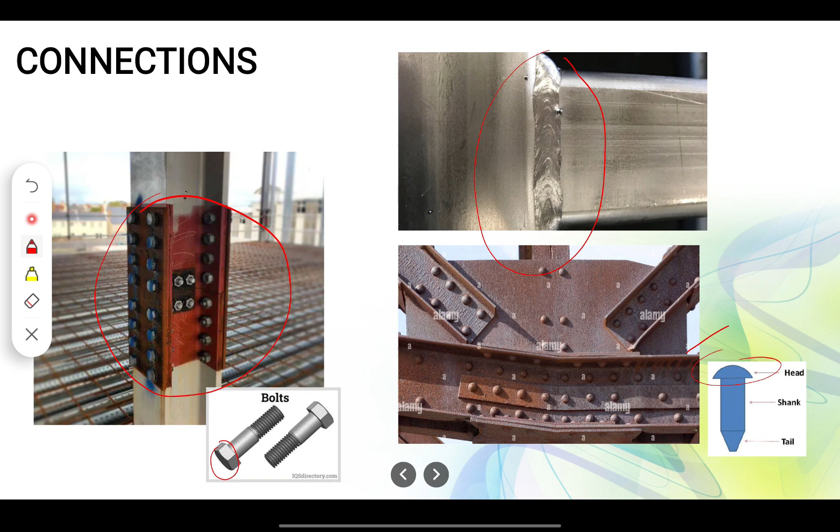But our focus for solving problems in principles of steel design will be simple connections, because we also have the moment type connections - shear and moment type connections. But we also have the eccentric connection - it's also a simple connection in nature, but there's a lot of consideration because we have moment.

But when it comes to simple connections, mostly we have the shear forces applied to the center of the bolts. The most common type of simple connection is the simple bolted connection. The advantage of this is it's an easy method for connecting members on site. In field, bolting is cheaper - it's more preferred because it is cheaper compared to welding.

Different types of bolted connection: we have the shear connection. It can be a single angle, double angle, shear tab or plate. So our plate, we make it as a shear connector. It can also be an end plate, or a seated angle - that's an angle bar.

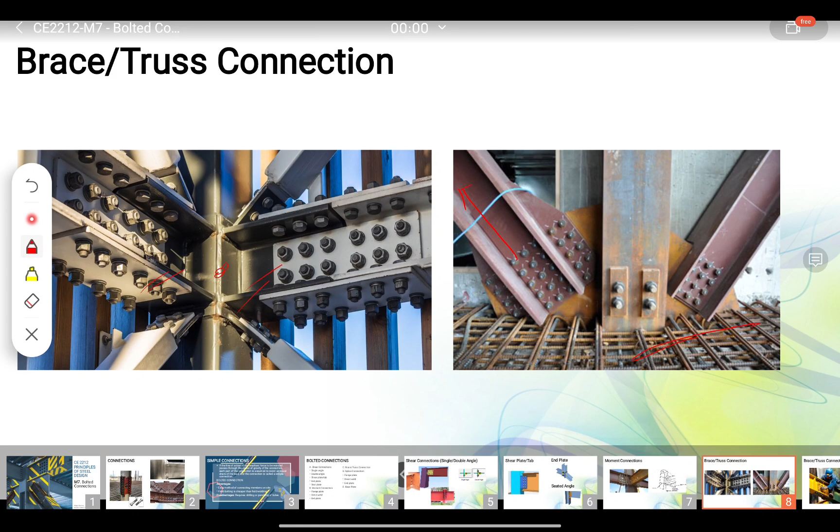So we need many bolts or larger bolt sizes if the axial force is large, because this creates axial tensile stress - tensile force. So when we distribute that and connect these members, we need many bolts to resist that tensile force.

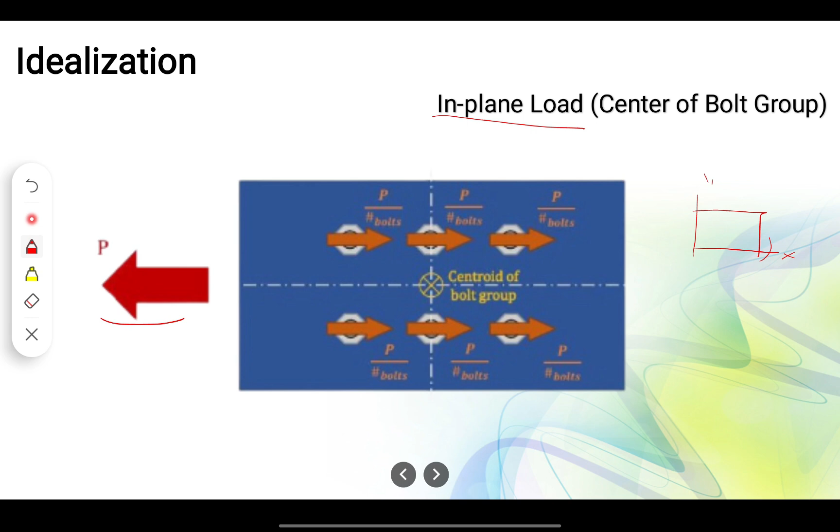So, noon naman nakalagay yung plates natin, XY, sa plane na yun. Pag in-plane load pa din, sa XY applied yung load, pero hindi na siya tatama dun sa center ng bolt group natin. So ano yung magiging effect? Pag merong ganyan, so ito yung center of bolt natin and ito yung force.

So magkakaroon siya ng eccentricity. So yung impact, kailangan natin dalhin yung force na to papunta dun sa centroid. Aside from the direct force, meron din tayong torsional effect. Kailangan natin yan i-consider both.

Aside from the direct shear, usually dinedesignate natin siya, nililabelan natin siya ng PD, na yun yung stresses niya. So from the direct shear over yung number of bolts, and then yung torsional effect. Kailangan na natin i-consider yung polar moment of inertia ng bawat bolts, and then yung moment na ma-generate because of the eccentricity applied, kapag yung load natin applied at a certain distance from the center of the bolt group. So the moment, usually P times E, and then yung distance ng bawat bolt.

So magkakaiba na ngayon yung matatanggap na stresses. Hindi na siya uniform all throughout for the bolts. Usually kapag yung pinakamalayo from the center, yun yung makakatanggap ng most na stresses. But take note of the direction of the components as well.

Kasi meron tayong torsional stress and meron tayong direct shear. Pag yung components na yun ay additive, ibig sabihin mas malaki din yung value na makukuha. Pero kapag nagkokontrahan sila, meron kayong upward Y component and downward Y component, so opposing sila. Ang effect nun, magsusubtract tayo ng value, mas nadidiminish yung makukuha ninyong resultant value.

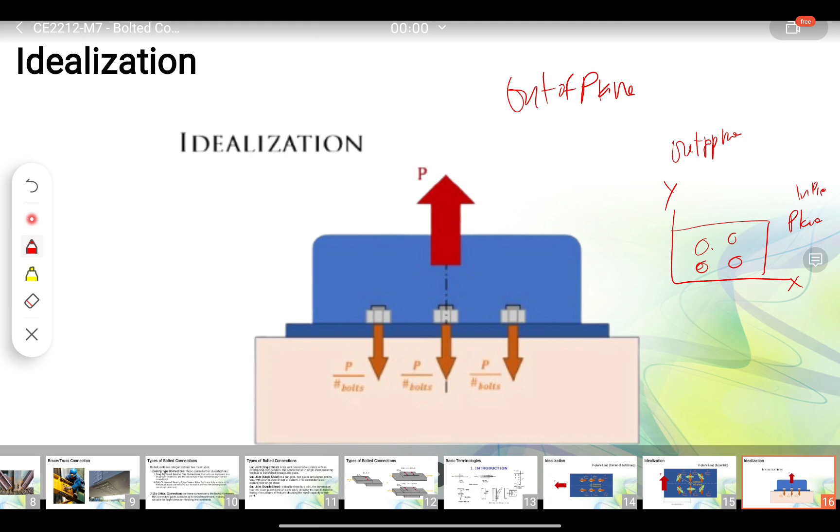So if we have out of plane, perpendicular na siya, yung loads na applied sa bolts perpendicular. Kahit applied siya dun sa center ng bolt group natin, hindi magkakaroon ng flexural effect. Pero ang meron dito, hindi na siya shear, kasi yung force na yon perpendicular na siya dun sa area ng bolts. So it's...

Anong type ng force o stress na siya? Since yung force natin ay perpendicular na doon, normal, it's a tensile stress na siya. So isang force lang yung stress type yung i-consider natin since applied naman siya sa center.

Unlike this one, if meron ulit eccentric, pero out of plane pa din yung force natin, at meron eccentricity, kailangan natin yan dalhin dito. Meron tayong direct tensile force, at yung effect ng moment. Yung effect ng moment matatransfer dito sa bolts. So aside from the direct tensile stress, wala siyang shear, meron pa tayong flexural effect.

Same lang sa mga beam natin, na magkakaroon depende sa orientation ng load natin, ng moment, kung ano yung configuration niya. Kapag ganito yung flexure natin, yung resistance niya dapat opposite, yung resistance ng ating mga bolts. Yung resistance ng bolt natin, tensile siya.

Yung part na to ay same lang yung direction ng na-draw ko, dapat opposing na siya. So yung effect, ito.

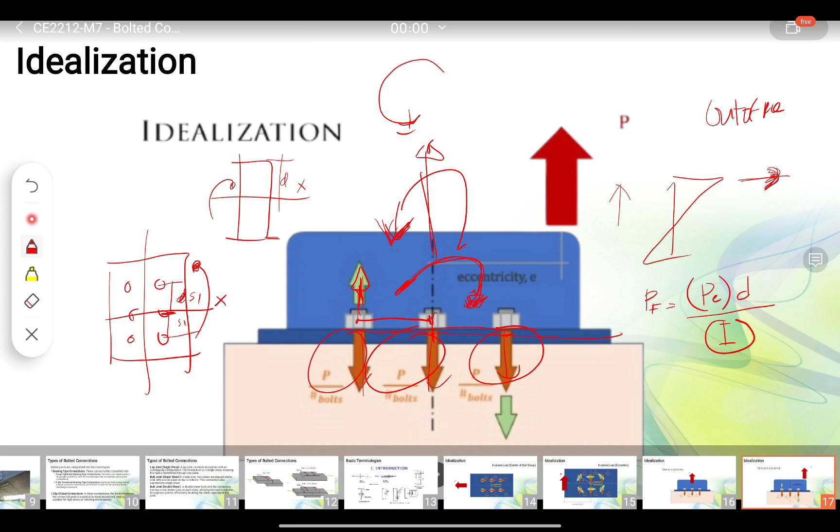So, if given yung spacing na yan, yan yung consider natin, at pag-add lang natin siya. Usually, yung mga stresses na nakuha natin dito ay per bolt, kilonewton, hindi talaga siya actual na MPa. Pero depende, if you have to consider the area, then pwede natin makuha yung actual shear stresses or the stresses experienced by the bolt. For this one, hindi na siya vertical load.

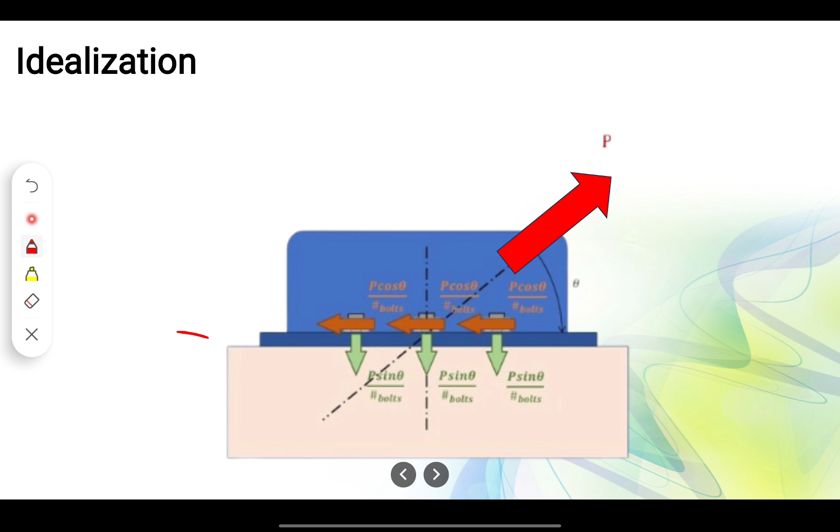Meron din naman tayong horizontal load, pero applied at a certain distance din, so meron tayong eccentricity. Ganun din, magkakaroon siya ng flexural, so it's either a tensile force here and a compressive force here. Pero yung critical for this one ay yung hugutin yung bolts natin from the connecting compared dun sa kung sinisiksik because of the compressive force. Aside from that, yung direct shear natin, magkakaroon ng effect pa din dun sa bolts, pero tatawagin na natin tong combined, kasi meron na siyang tension and meron din siyang shear. Ganun din, kapag meron tayong incline, we also have a tensile force and a shear force.

So, what are the limit states for a bolted connection? Shear and tension kapag merong flexure, and combination ng shear and tension for bolts. However, meron tayong additional considering the bolt and then the connecting member stresses around the circumference of the bolt. Yun yung tinatawag nating bearing, yung contact area ng bolts natin, magkakaroon tayo ng bearing stresses.

So, we have this shear failure, very common. Ito yung direct shear, yung heads ng bolts or body ng bolts yung matatanggal, either the threads. If yung bearing natin, malakas yung bolts ninyo, hindi nasira, pero mahina yung plates natin, since yung consideration natin sa formula for bearing is FU. Ibig sabihin, pag mahina yung FU ninyo, it will have a big chance na mag-fail siya due to bearing. So, yung effect niya is tear out or deformation around the bolt.

So, kapag gano'n na yung bolts natin ay malakas, pero yung circumference, yung stresses, yung plates natin around that, humina na siya, lalaki yung part na yon. Eventually, masisira pa din yung assembly natin kasi lumaki na.

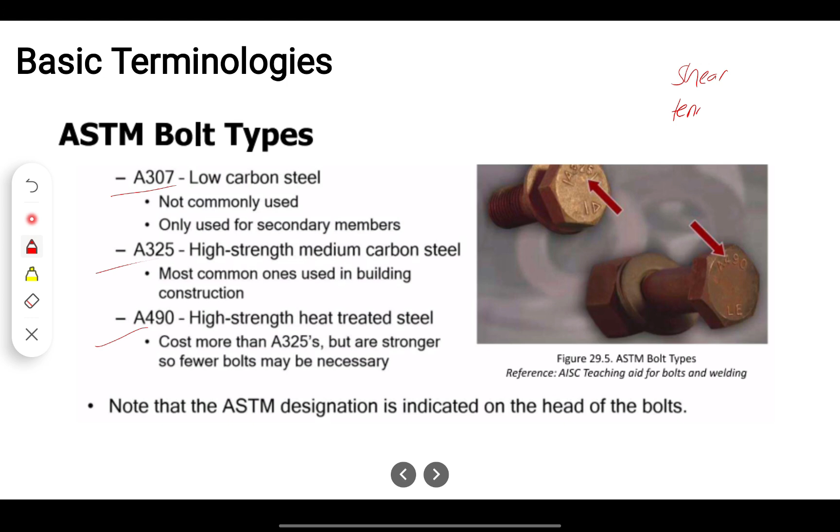So, different types of bolts. Very common, 307, 325, 490. Magkakaiba yung magiging shear, kasi bawat bolt, meron yan shear capacity and tensile capacity. Mamaya, I'll show you the table for the different values of the shear stress.

So, different types of bolts, you can read this, but we can expound this later sa S2. But our focus now, okay, wait lang. Ito yung tinatawag nating threads. Kapag nandito yung connecting member natin, ito yung may chance na mag-fail. Ganyan yung connection, and then yung center, ito yung mga plates natin. Pag ganyan yung configuration, ito yung masisira, so yun yung tinatawag nating threaded.

Threaded part yung masisira. Pero pag dito natin siya nilagay, yung mga connection natin, at dito na install yung bolts natin, so unthreaded yung part na yan. Magiging magkaiba din yung capacity niya kapag ito yung nilagay natin doon sa center. Kapag yung part na yan is threaded, alin sa tingin niyo yung mas maging critical? Kapag threaded, mas lumiliit na yung area, pero kapag unthreaded, yung buong diameter ng bolts yung consider natin. Hindi yung diameter ng head yung i-consider, it's the diameter of the bolts.

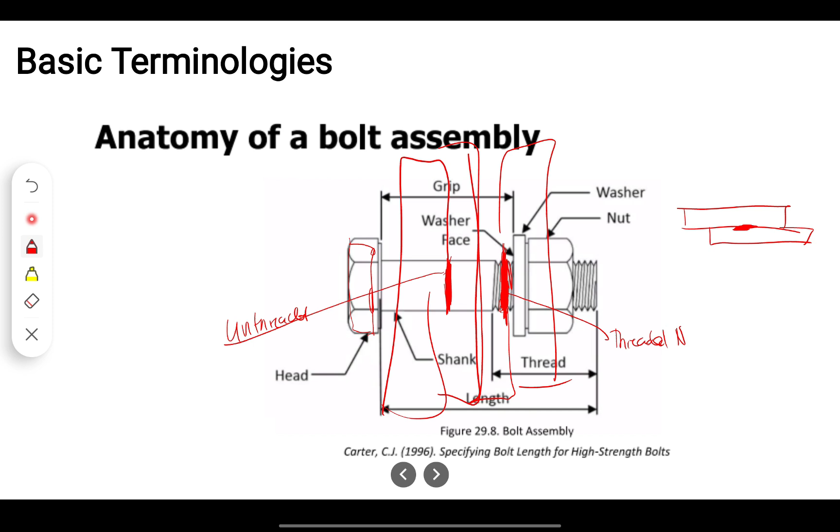So, kung mapapansin niyo na kapag ito yung nakakonect doon, may possible na masira, connected doon sa plate natin, mas maliit yung magiging shear capacity niya. So, let's see the table.

So, we have the shear force and this is the transfer mechanism. Bolt bearing, we have two types.

We need to check the bolt tear out, which is based on our spacing. We need to consider and solve for the spacing between bolts, especially when located at the edge, because the spacing LE and LC that we need to consider differ when it's at the edge. It's important that we design our spacing appropriately because the capacity of bolts against tear out is based on that.

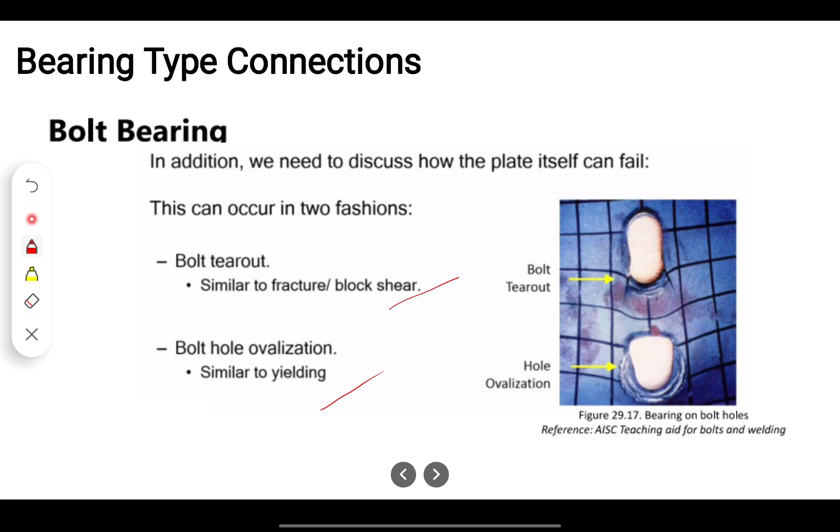So bolt tearout is similar to fracture, like block shear. Bolt hole ovalization is similar to yielding. Okay, so what's the value of the capacity?

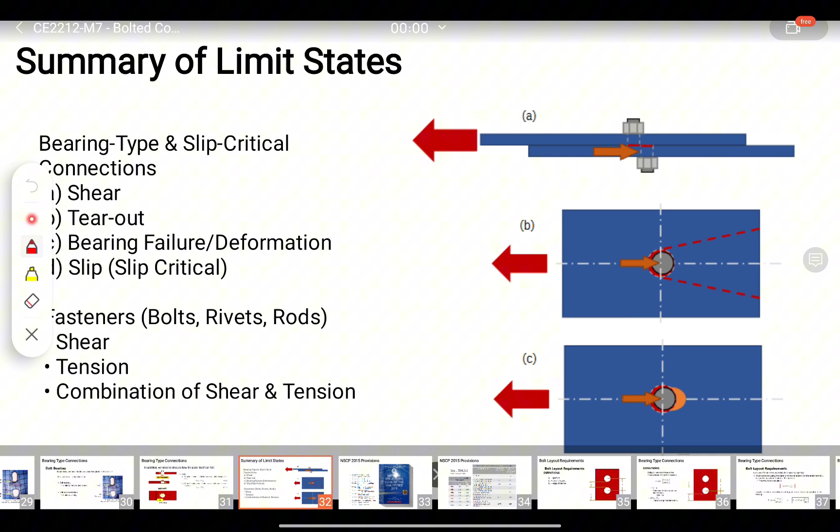Again, for the bearing capacity, there are two considerations: bolt bearing or deformation, and tear out. We can shortcut this by taking whichever is more critical, the minimum between the two - one is for tear out, the other is for hole deformation. Whichever is smaller between the two is what we use for design, same as always - the smaller load is our goal.

Okay, so if the spacing of bolts isn't given, you can estimate it as 3 times the diameter of the bolt. If the diameter is given but the center to center spacing isn't provided, you can use this assumption.

For maximum spacing, we're not allowed to exceed this - it's either the minimum between 14T or 7 inches, which is equivalent to 180mm for SI units.

For edge distance, these are the minimum edge distances. If we're using an M16 bolt, at sheared edges we use 28mm. We can use a higher value than that.

And the maximum for edge is 12T. Unlike sa center to center na 14T, but this one, maximum natin for edge is 12T.

Now for the capacity of our bolts, same lang yung formula natin. Alam na natin yung shear. Basta given, mag-refer lang tayo dun sa table.

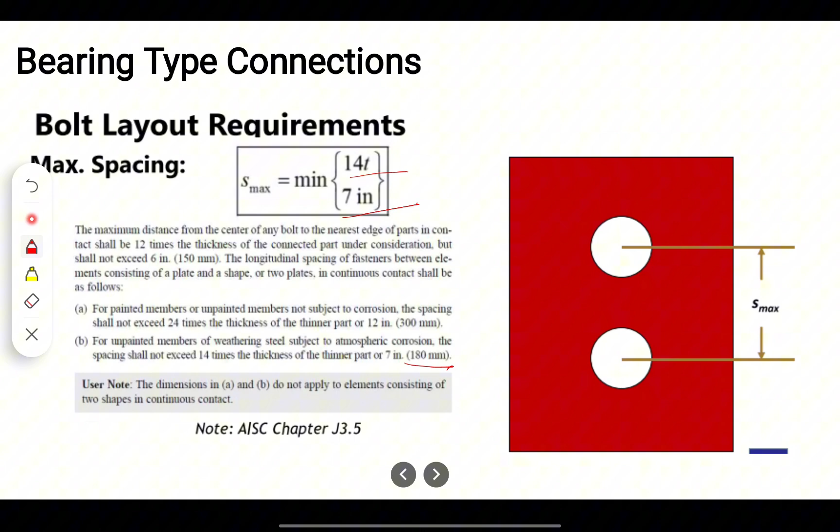Sinabi sa problem na A307, yung tensile stress ng bolts na yun is 310. Predefined na yun, 310 megapascal. So hindi FY, FU ng plate yung ginagamit. Pero pag sinabi sa problem na A36, it refer to the plates.

Tensile plate na gagamitin, so FY, FU. Gagamitin natin to for the yielding, for the gross, for the rupture, and ito, yung FU, ito yung ginagamit natin for bearing. So yung bearing natin na tear out and deformation, FU yung gagamitin. But for the bolt itself, either tension or shear, will be using yung property ng bolts.

So ano ba yung mga typical naming natin? Magkaiba yun, A307, A325, iba siya dun sa A36. Sa mga steel plates yon. Pero sa bolts, may sarili din siyang designation and meron din siyang stress na na-determine because of the testing. Yun yung commercial sizes ng, or capacity, commercial strength ng mga bolts.

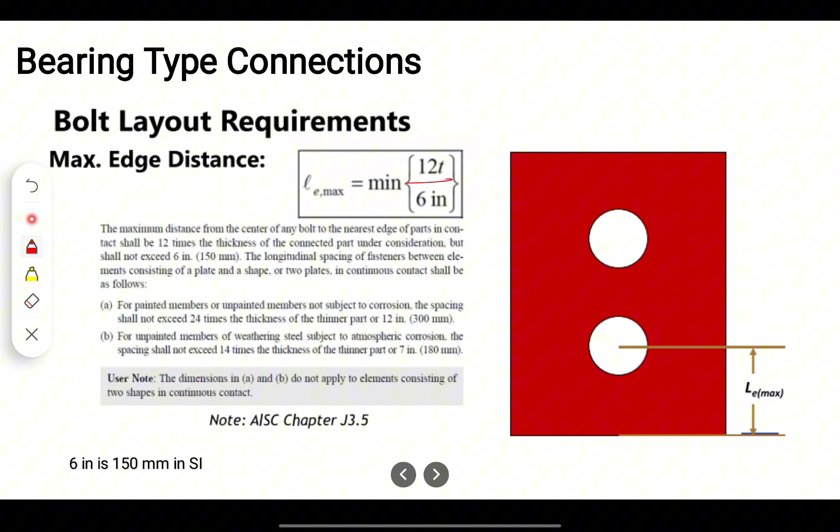So FNT, dapat given niya sa problem. FNV, so stress times area, magkakaroon tayo ng force. Nominal pa lang yan, para makuha natin ulit yung design capacity for due to the bolt, tensile and shear strength, we have to use this reduction factor and factor of safety.

At pag meron tayong combined, kailangan natin kunin yung modified. So yung modified natin, nominal stress pa lang to. Yung nominal stress is 1.3 FNT minus FB. Para makuha natin yung force, multiply na lang natin ng area. Kailangan natin i-modify, hindi na FNT yung gagamitin. Pag combine, kailangan natin siyang i-modify using this formula.

So para makuha natin yung ultimate, kailangan natin siyang mag-multiply pa ng phi, bukod sa 1.3 FNT.

Naulit lang yung formula for bolt bearing. Yung focus lang natin dito is yung part A from NSCP, not this one. Although, if you want to study more, if meron pa ibang details na binigay dun sa problem, then you can use this different types of provision.

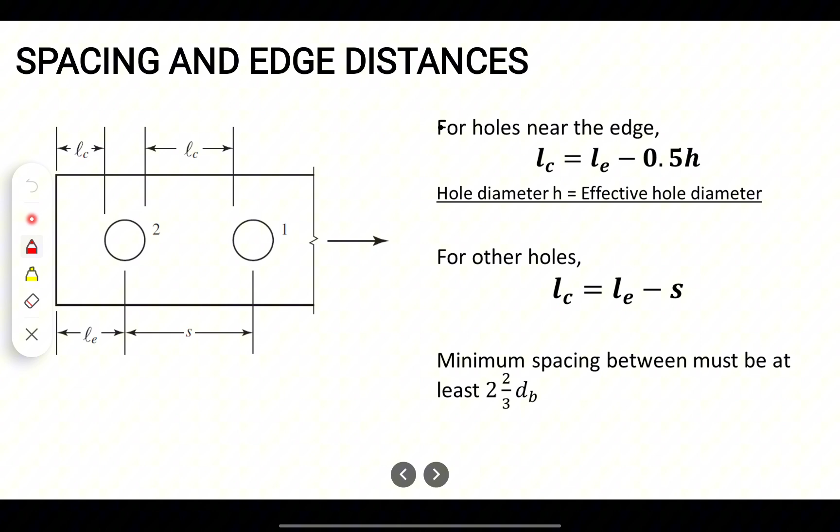Okay so let's start solving problem. Let's try this one. Given tayo ng connection shown in the figure uses a 20 mm and A325 X bolts. Take note na gagamitin ay A325 and then meron siyang X dun sa naming. So the tension member is A36 steel and gusset plate is A572 steel.

So we need to determine the design and allowable strength of the connection considering yielding and rupture of tension member. So we are going back to our lecture 2, which is tensile member, tension member. And we also need to consider now the shear on bolts. So aside from the shear on bolts, we also have to consider the bearing on the plates.

So yung shear on bolts natin, yun lang i-consider kasi wala naman siyang tension. And we assume na applied sa center ng bolt group natin yung force. Also given din yung mga thickness ng mga plates. So the main tensile member is 12 mm plate, and yung gusset plate natin has a 9 mm thickness.

And provided na din po yung mga spacing. So yung edge natin is 37.5 and we also have 75 mm. We also have different spacing. Gawin ko lang tong 32.5, hindi na siya makita. You can almost see the values for the spacing, and the center has a 75 mm and the other edge has a

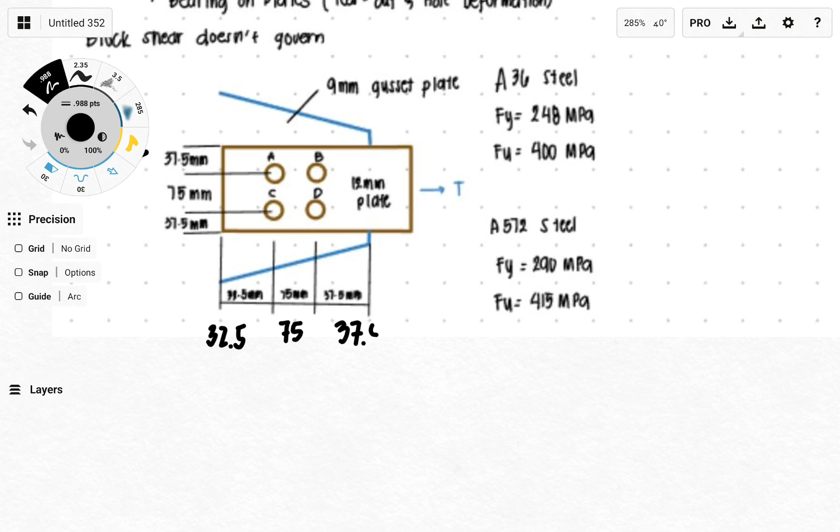37.5 mm, and also listed down the values of the steel properties now for the tensile members and also the gusset plate. Now if we try to look at the table regarding the capacity for our bolt, which is yung bolt na gagamitin ay A325X.

If we're going to refer to the table from NSCP, the tensile capacity or FNT, ito yung tension natin. So it has a 620 megapascal, and the shear stress FNV, if it is shear, so we have to use the designation or subscript of V now if we refer to a shear stress. So it has a 457 MPa.

Okay so our solution, we need to go back to the tensile capacity. So the solution for this one, we start with yielding, of course, for our tension member, and also that's what the question requires. So we have to solve it appropriately, and also we just follow the process. Usually yung mga problems naman natin dito is just procedural, so we just have to follow the process para sa inyo din na hindi tayo maliligaw sa pag-solve. Ganun din kapag nag-e-exam tayo. So nasa process, tamang process lang.

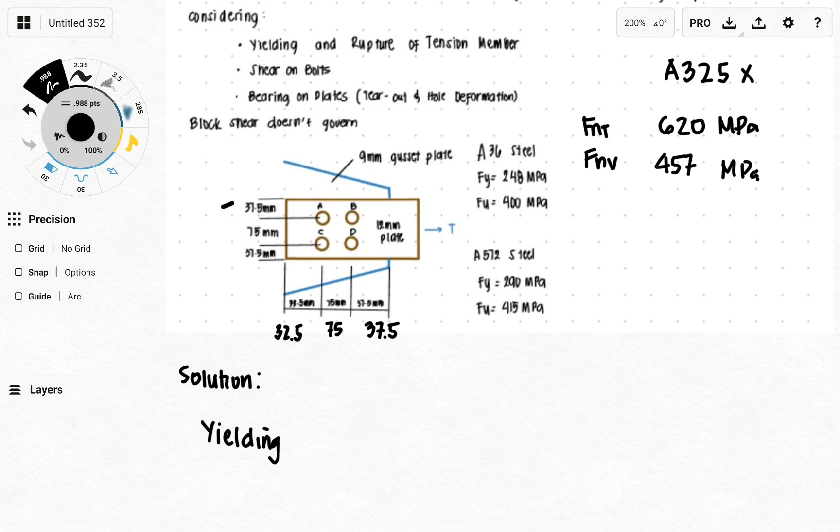I know you're already familiar with that from your previous exams, but we also have to follow the same principle all throughout for most of your design subjects.

Okay, so we start with yielding. For yielding, the formula is based on nominal values first, without reduction factors, because we need to solve for both design philosophies, LRFD and ASD. So for yielding, we have PN, which is FYAG. We already know the yielding value, 248.

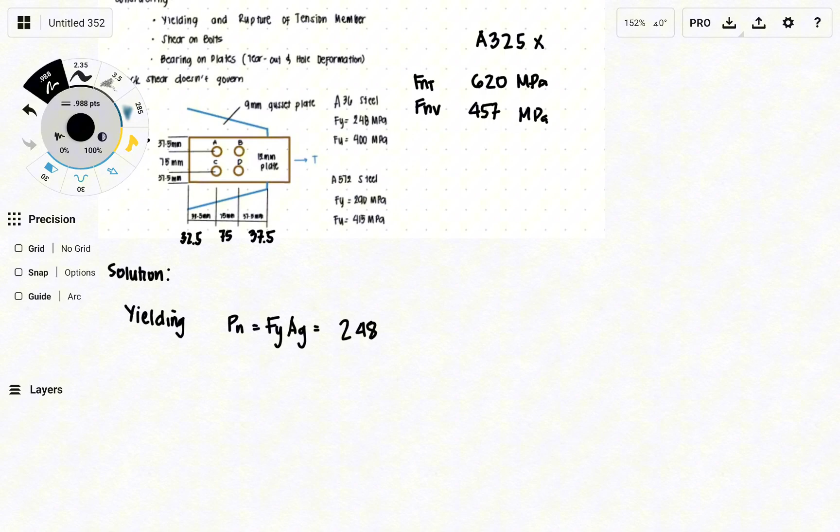So we start with the gusset, no, the tension member. Why did I mention the gusset plate? It's because of the thickness we need to consider later. But for the tension member's yielding and rupture, we don't need to consider the gusset plate, even if it's 9mm, because its area is varying - it's hard to determine what its gross area would be, and also what we'd consider for rupture, since we'd need to deduct the effective diameter of the bolts, which varies. So it's not constant, and we neglect the assumption that the gusset plate would also fail for yielding and rupture. So the critical member is only our tension member against yielding and rupture, because its area is known.

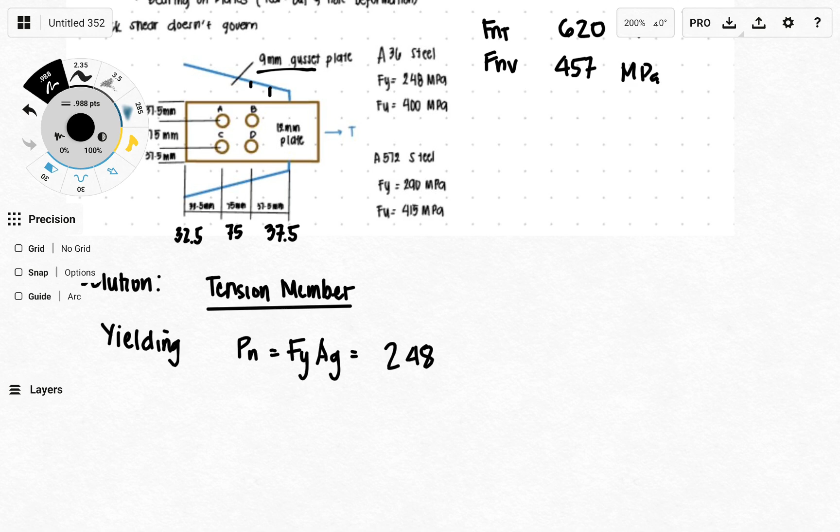Okay, so going back to our solution, FYAG - what is the AG of our tension member? It's a rectangular tension member, so it's not provided directly, but if you try adding all the spacing, what do you think we'll get? Let's try solving for what the width of our plate will be. So 37.5 plus 75 plus another 37.5, giving us 150 for FYAG.

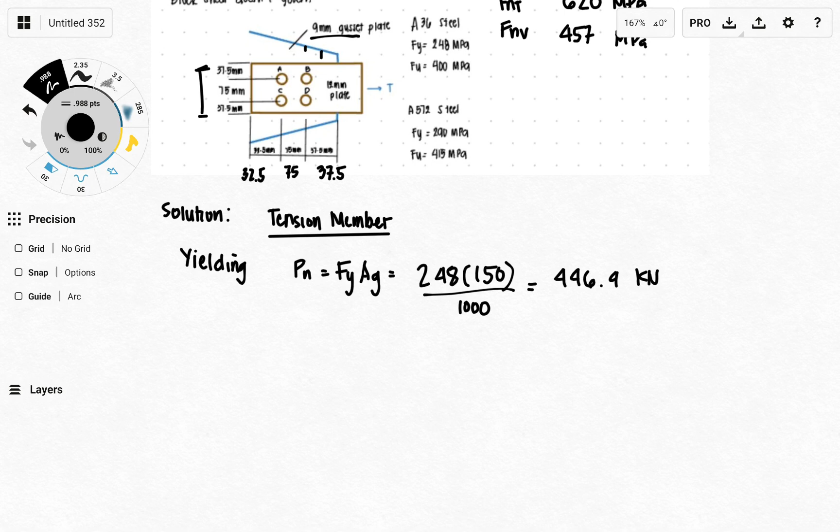So 248 times 150, divided by 1,000, and we get 446.4. Correct me if I'm wrong - you have to resolve this and approach me if there's something wrong in the solution, so we can correct it. Now solving for the ultimate, we just multiply by a phi value: 0.9 times 446.4, we obtain a value of 401.76 kilonewtons.

And for ASD, PN 446.4 over 1.67, we obtain a value of 267.305 kilonewtons. Now for rupture, since all elements of our plate are connected, we use a U value of 1.0.

And the FU value for our plate is 400 megapascal. Now solving for the nominal, our formula for rupture is FU times U times AN. We already know the FU value, and U is 1.0 - you can also neglect that.

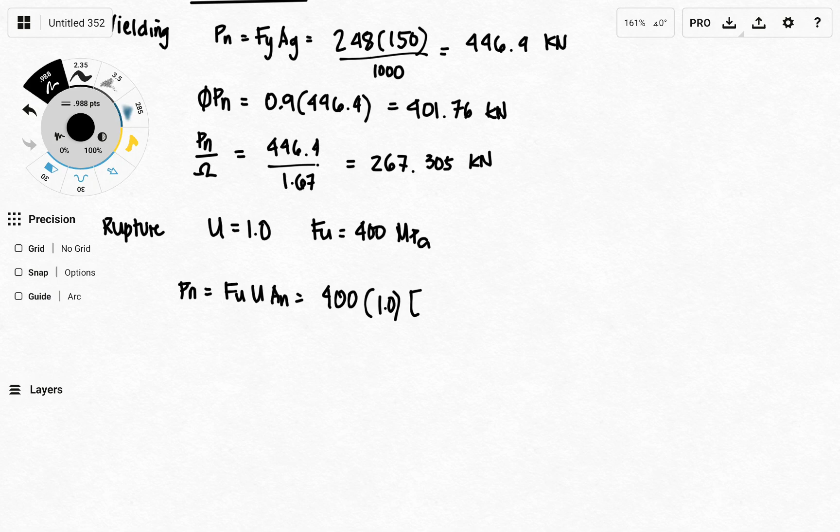And the area net is based on 150, the total width. So this is where we cut, same as if we cut at bolts AC - we just remove two bolts. And the consideration again is the effective diameter. The original diameter of our bolts is 20mm, as given in the problem. Since 20mm is less than 24mm, we add 4, so plus 2 plus 2 - the effective becomes 20 plus 4.

Still remember that? I hope you will not forget these formulas, even in the board exam. I guess in the board exam they usually provide what the diameter of holes will be, but usually the assumption is 3 or 2, depending on whether they're still using the 2001 NSCP. So going back to this, 20 plus 4 is 24 - 24mm already. And then don't forget the thickness.

This is a tensile member, the main tension member, so the thickness is 12mm. We divide it by 1,000, and we obtain 489.6.

Okay, continuing our solution with the normal process - 0.75 times 489.6. Please double check the values I'm getting. Using a calculator, we have 367.2 kilonewtons. And for ASD, we have 489.6 over 2.0, giving 244.8 kilonewtons.

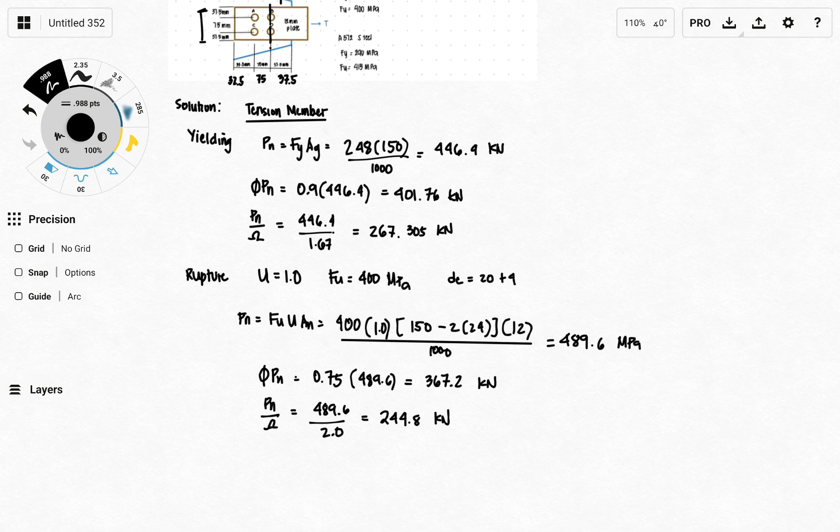So for bolted connections, there's capacity in there - we have the shear force. The effect on the bolts is shear, but the tensile effect is on the tensile member. This might confuse you - the force applied is tensile on the plates of the tension member because it's perpendicular to the area. But since the force on the bolts is divided by the number of bolts, it's parallel to the area, so the effect on the bolts is shear, and that's also how the bolts fail.

So for the third limit states for this whole assembly, a tension member, but we need to consider the bolt shear, because this is what tends to fail. So for bolt shear, what is the AISC 360 provision?

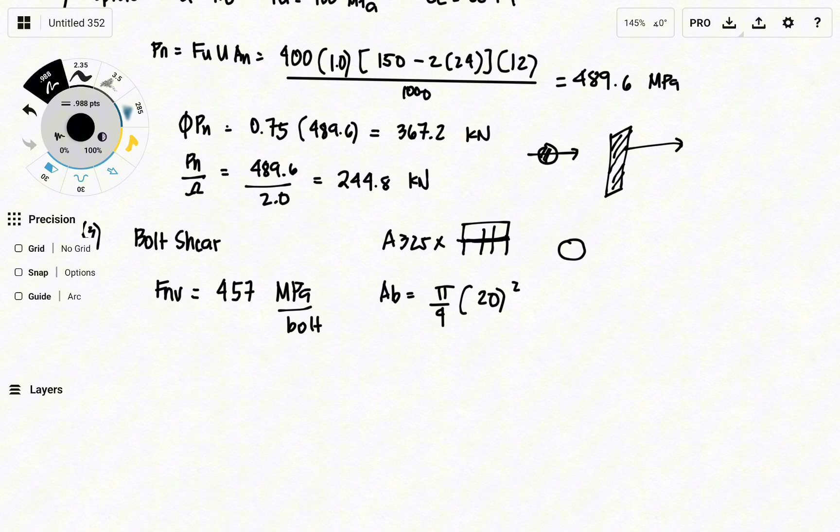So this is not the effective diameter. You might get confused there. So you have to consider that for bolt shear, you have to go back to the raw or original diameter of the bolt.

Now, solving for the nominal capacity for our bolt shear, we now consider the total number of bolts. So FNV times AB times however many bolts there are, because all of those have contribution and that's what will resist our applied force.

Overall, once we get all of the limit states capacities, then again, we compare which is the smallest among all of those limit states, and that will be the design strength of our bolt assembly, including the tension member.

So going back to our solution, so much was discussed. Okay, so we have FNV 457, and then our AB, area of bolts, already provided here, 20 squared. How many bolts are there? If there are many bolts, let's just count them. I think for sure, in this part, you won't make mistakes.

So we have 4 over 1,000. Again, we divide by 1,000 to get the value in kilonewtons. Some of you are still struggling with dimensional analysis. And then, of course, using your calculator, or mentally if you're already really good at solving problems like this.

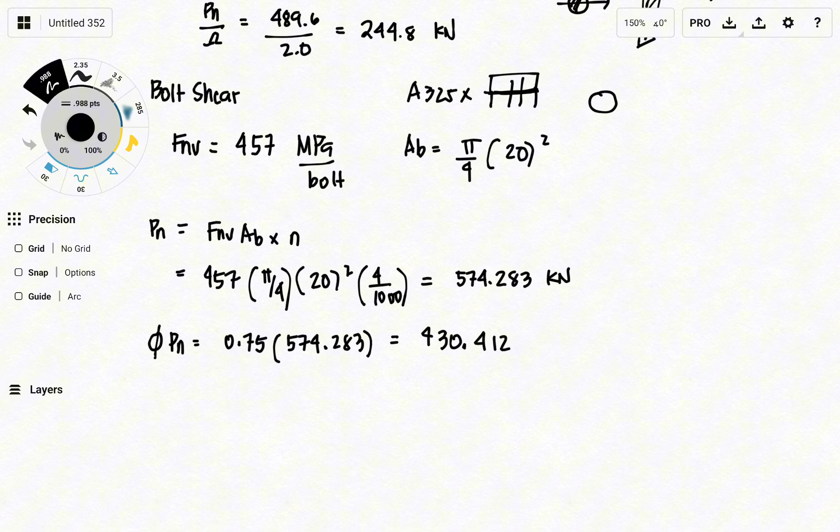574.283, and then we obtain 430.412. And then for ASD, PN over omega, 574.283 over 2.0, then we come up with 287.142 kilonewton. So it's a process, same process all throughout.

So you'll do this, and by trying different problems, I know you can make your solution to this problem as fast as possible, especially when you're doing your examination. Our goal is to beat the clock and solve the problem as accurately as possible.

Now for the fourth limit states, we have bearing. We have two types under bearing failure. Now, for bearing limit states, we have to consider the bolt tear out, which is based on our spacing, and the hole deformation.

So this one is a bit challenging because we need to analyze our bolts individually, since each bolt has a different contribution. We need to check the actual bearing failure of each bolt because the possibility of what governs varies for each bolt—for one bolt, bolt tear out might be what we need to use, and for other bolts, hole deformation might govern.

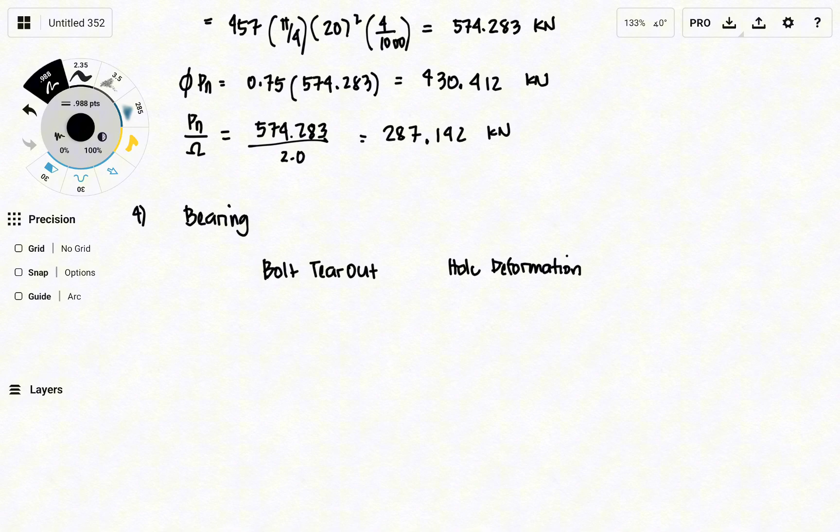So it depends on the diameter of the bolts, but I think the bolts have the same diameter, and the thickness we're going to consider is just the same if we're considering only the tension member. But if we're dealing with bolt tear out, the bolt tear out capacity will differ.

For this problem, we have 4 bolts, and given spacing of 75 and 37.5. Let's double check, baka mali. So we have here 37.5.

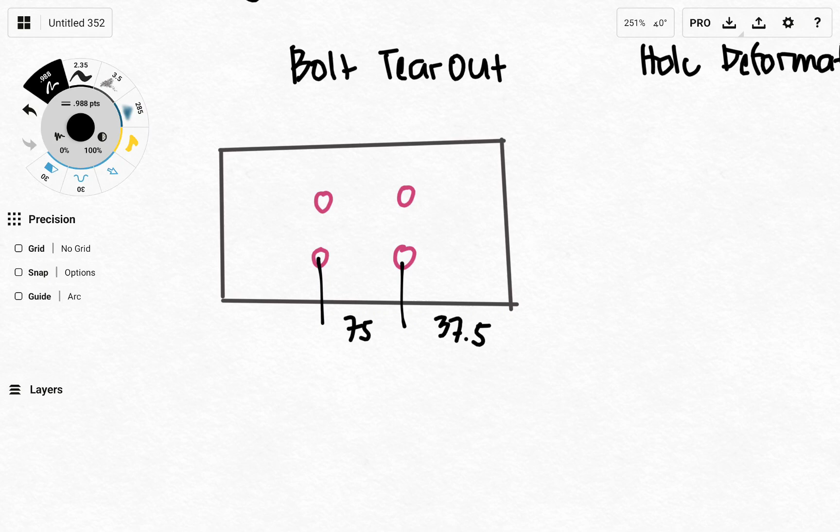For the formula for bolt tear out, we have 1.2 LC times T times FU. So that T, our LC is considered based on the spacing. If it's interior, usually we designate it LC1, but you can use a different designation, LC, LC1. Depende sa inyo, you can use other designation. I can still understand that as long as the process is there and the values and formulas you are using make sense based on what's given in the problem.

And then the next one, LC2, we usually use if it is located at the edge. That spacing is under or at the edge of our plates. So for this one, we have LC1 and LC2. We need to solve for that value.

So why 37.5? Ayan. So our LC, pwede kasi siyang mahila, no? Pag meron tayong tensile force, dito siya mag-extend yung mga bolts na yon, sabay-sabay yan. Worst case scenario, maabot talaga yung dulo. Sabay-sabay sila.

Now, for this type of problem, we need to consider the connecting member and the connecting plate - the connected member and the connecting member. Dalawa kasi yan. So we have to consider both the main tension member and the connecting member, which is the gusset plate.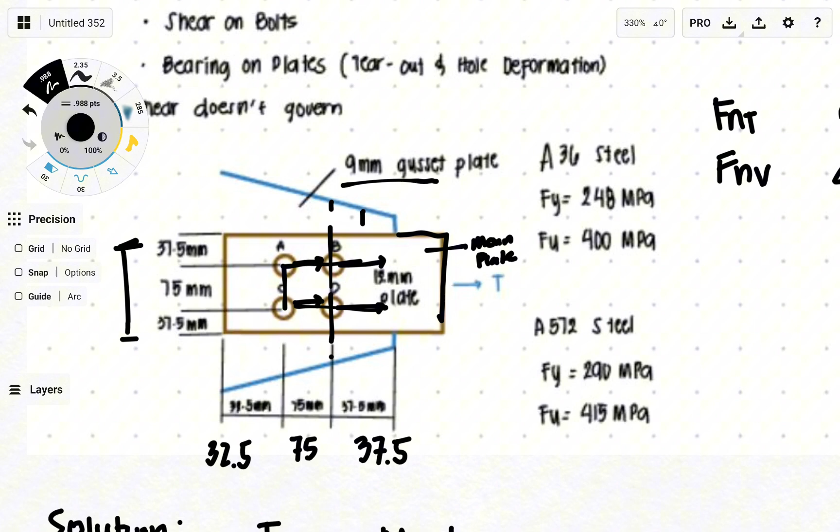Now, what happens if yung gusset plate naman yung i-consider natin? So pag gusset plate kasi, ito yung kailangan natin i-consider na thickness. Yung kabilang side naman, ito yung kailangan natin i-consider na spacing. So magkakaiba yung makukuha nating LC, depende sa kung ano yung configuration natin, kung saan yung direction ng paghila.

So, if we're considering the main plate, ito yung hila ng mga bolts natin, ganito yung tear out niya. Pero pag if we're going to consider the gusset plate, doon naman siya papunta. Yun yung kailangan natin i-consider na spacing. So, let's analyze both. Magkakaiba lang yung ko-consider natin na LC.

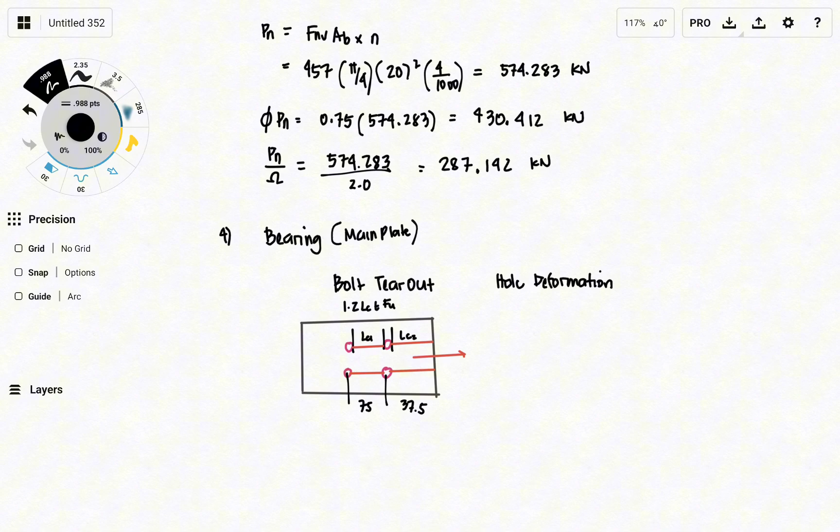So, let's consider first the bearing for our main plate, wherein yung LC na gagamitin natin is yung mga values at the right - the spacing at the right part of the bolt assembly. So we have to solve for LC.

And we also have the hole deformation. So, paano yung mechanism ng hole deformation natin? Simple lang, no? Magde-deform lang yung perimeter ng mga bolts natin. Same lang yan, kahit ano pa yung ABCD natin, because meron designation yung mga bolts.

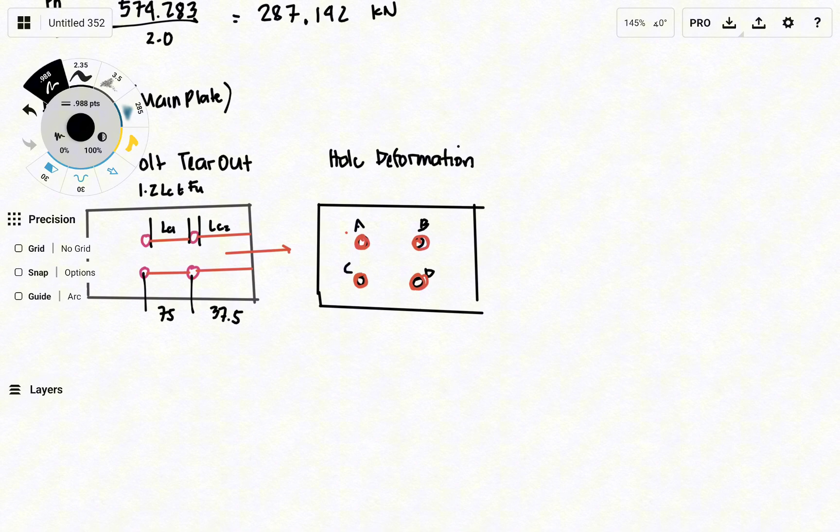So, we have 4 bolts and we can designate it by ABCD. Magde-deform lang yan, lalaki. I don't know if it is the loose thread na tinatawag, but hole deformation can also be referred to as bolt ovalization kasi nag-o-ovalize siya.

And then the formula that we're going to use for hole deformation is 2.4 times the diameter of the bolts - diameter of the bolts, not the effective diameter, baka malito kayo - and thickness, and FU. Now we solve for the LC for our main plate.

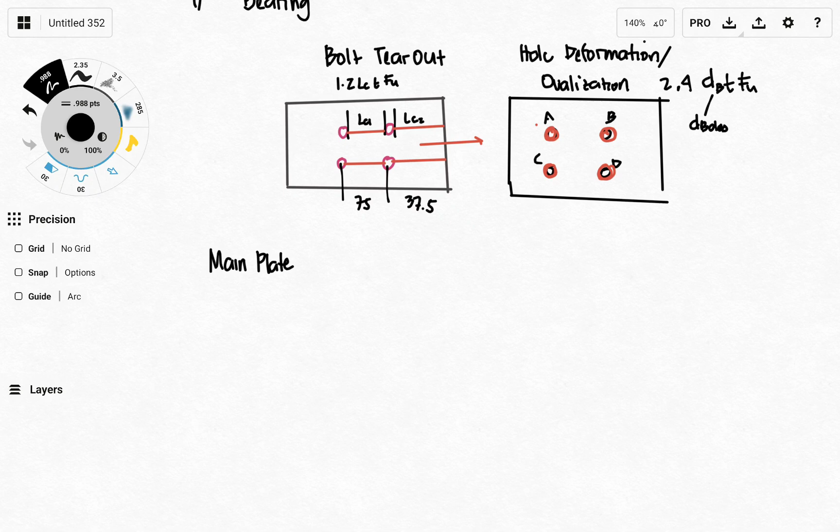So what we are going to use for our main plate. So ibahin natin, no? So again, analyze natin for main plate. Paano ba siya masisira? Okay, so for our main plate, kung ganun yung hugot, dun yung matatanggal. Okay, so magkabaligtad pala, no?

So, pag ganito yung hugot, sa main plate natin, papunta kasi dun yung failure. Parang kagaya dun sa block shear natin. So, dito siya mag-stretch, meaning to say yung kabilang side yung kailangan natin consider LC2 and then LC1. But for the gusset plate, paano ba yung gusset plate natin? So, natanggal na yung we have the gusset plate.

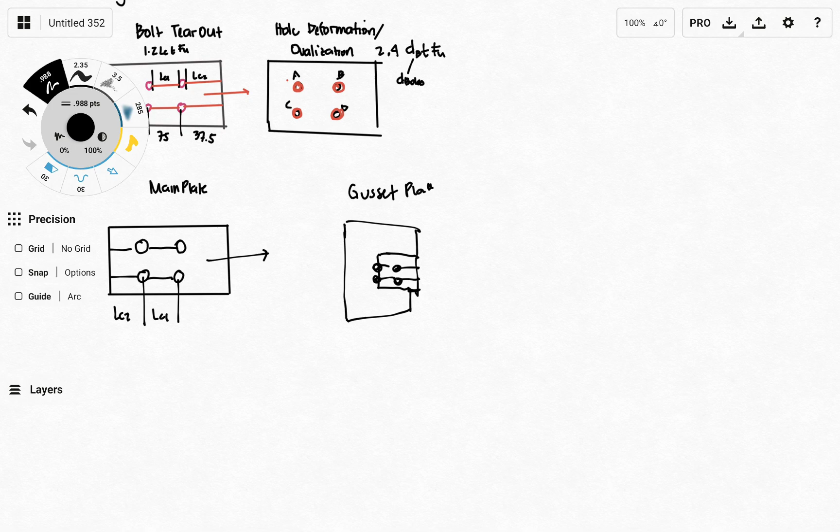So, this is the part of the gusset plate that will be removed, if ever, but extend niya. So here, it's actually opposite. The extension of the gusset plate is on the right, but for the main plate, we need to consider LC2 for our gusset plate and LC1.

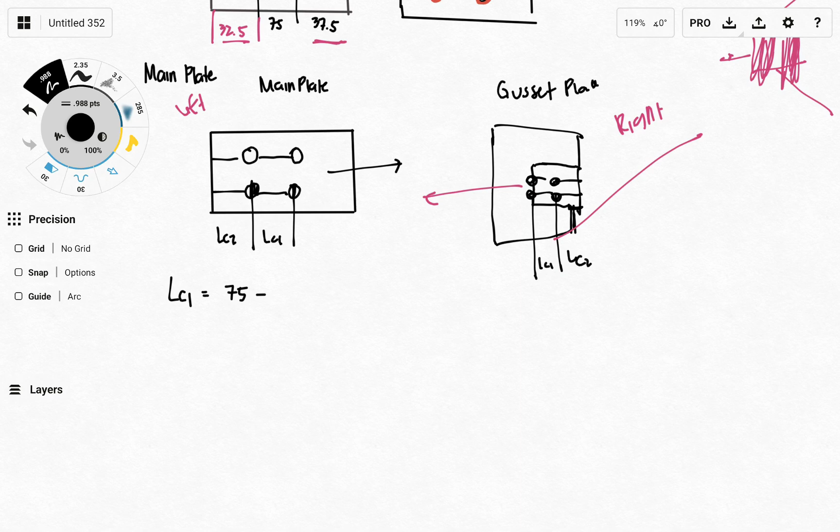Let's start with solving LC1. For LC1, this is just the spacing center to center minus one diameter of the bolts, since half of it will be removed. Effective - don't forget we need to consider effective. So 24, we have 51 mm.

And then for LC2, this spacing is what we need to consider. We have 32.5 and half of the diameter, effective diameter of the holes, 24. So 20.5. And then for the gusset plate, our LC1 will be the same, 75 minus 24, 51. But the LC2 is the other spacing, the right part, which is 37.5 minus 0.5 of 24.

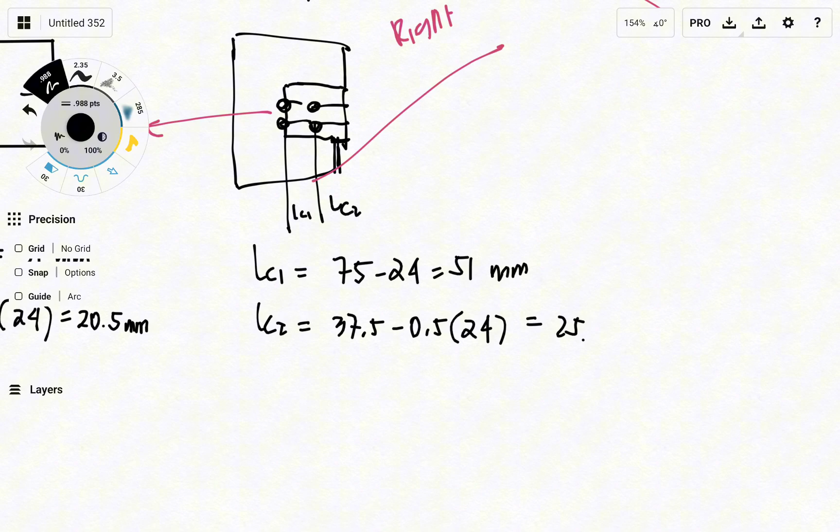Now again, we can solve for the bolts - bolt capacity for both tear out and hole deformation. So these will differ, class. For bolts, we start with bolt A and C - A, B, C. Now this is the challenge: the length, LC, considered by each bolt varies as well. For bolts A and C, they use the same LC, which is the one at the edge.

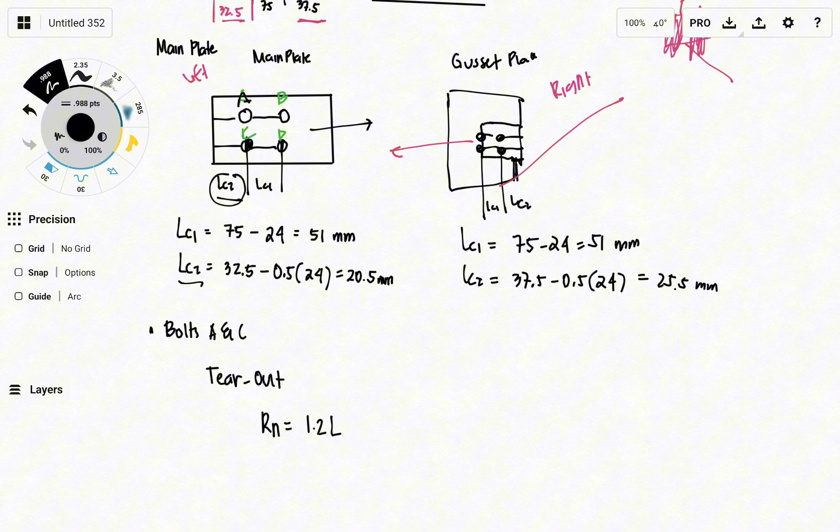So for bolts A and C, LC2 is the one used. So tear out, let's start with tear out. Rn is equal to 1.2, LC2, thickness, and then Fu. So we have 1.2, and 20.5. Our thickness is 12 since the main plate is considered first. Later we'll also consider the gusset plate. Over 400, then divide by 1,000. So we have 118.08 kilonewton - this is per bolt only.

Next, we need to consider the hole deformation. Hole deformation for both A and C will be equal to Rn 2.4 db thickness times Fu. So 2.4 - now the db we need to consider is the original bolt diameter, 20. Times thickness, 12, 400 over 1,000. So why did it become 1.2? We have this 2.4. Then we solve it: 2.4 times 20, 12 times 400 over 1,000. Now we obtain 230.4 kilonewton per bolt.

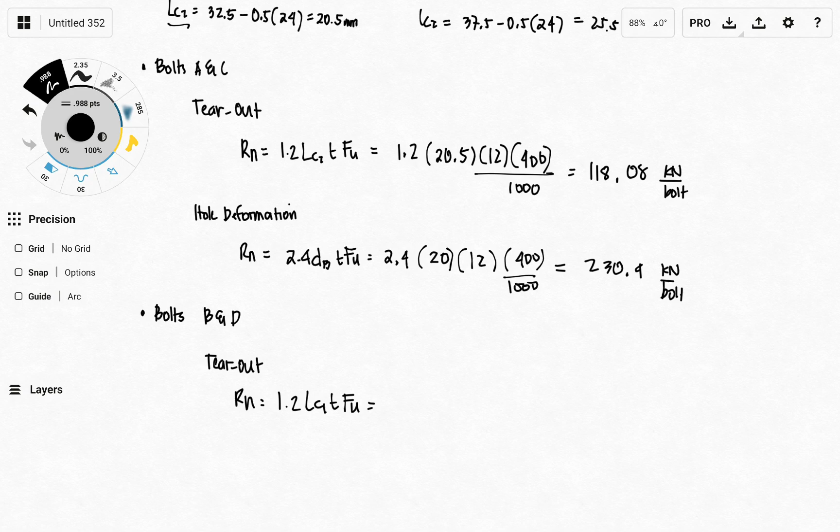Now for bolts B and D, for its tear out, Rn, instead of 1.2 LC2, LC1 is the one used. So it is LC1 that we are going to use for bolts B and D. And we have 1.2 LC1 already computed for this value, which is 51. We expect a larger value between these two. 12, 400, 1,000. Now going back to bolts A and C, we need to pick whichever is smaller between this value - only one can govern.

So for bolts A and C, it is the tear out that will govern because it gave us the smaller value. And then we have here for bolts B and D. Solving this: 1.2, 51 times 12, 400 over 1,000. Then we obtain 293.76 kilonewton per bolt, so it's much larger because of the spacing. Now for hole deformation, even though we will not further expand the formula, we will obtain the same value, which is 230.4. Comparing these two values for bolts B and D, tear out and hole deformation, we need to pick the smaller. So for bolts B and D, it is not the tear out that will govern - it's the hole deformation because it yields us the smaller value between the two.

Okay, so 230.4 is what will govern for this. Now we have to combine. Since per bolt, we'll count how many bolts we're considering for each row or layer of bolts. So for overall, our Rn against bearing will be 118.08.

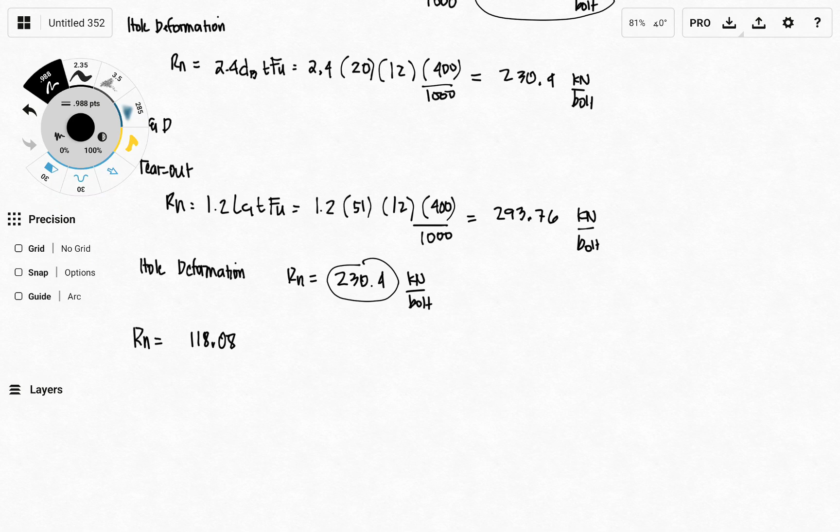How many is that? We have two bolts there, bolts A and C, which are located at the edge. So that's just two. Plus 230.4 for bolts B and D, which is also two bolts. So we just need to add all of these values: 118.08 times 2 plus 230.4 times 2.

696.96 kilonewton. Now we can apply the reduction factor to obtain the LRFD values. So 0.75 will also be used for bearing — not challenging anymore since the reduction factors are almost the same, and of course you'll use NSCP for your exam. So Rn over omega equals 696.96, with 0.75 used for LRFD, and 2.0 for ASD.

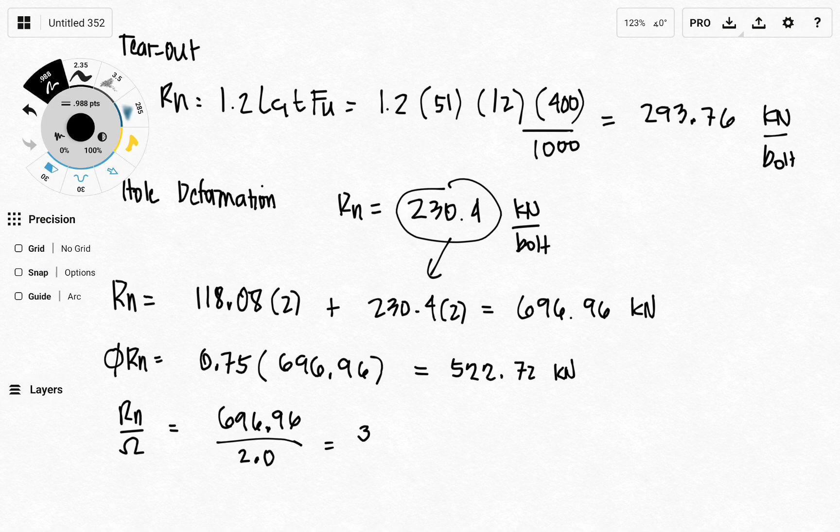The process of solving for connections takes a long time, there's additional work involved. Let me double check this since I'm trying to solve it. So that's 696.96 over 2. If we solve this, it will consume a lot of time, but we will try to solve some more problems tomorrow.

So we obtained 348.3. Aside from that, we also need to check the gusset plate part, since there's a possibility this will govern. For gusset plate, what changes is the thickness and the LCs we'll use. There's a chance this governs because of its smaller thickness. For bolts, it's now different.

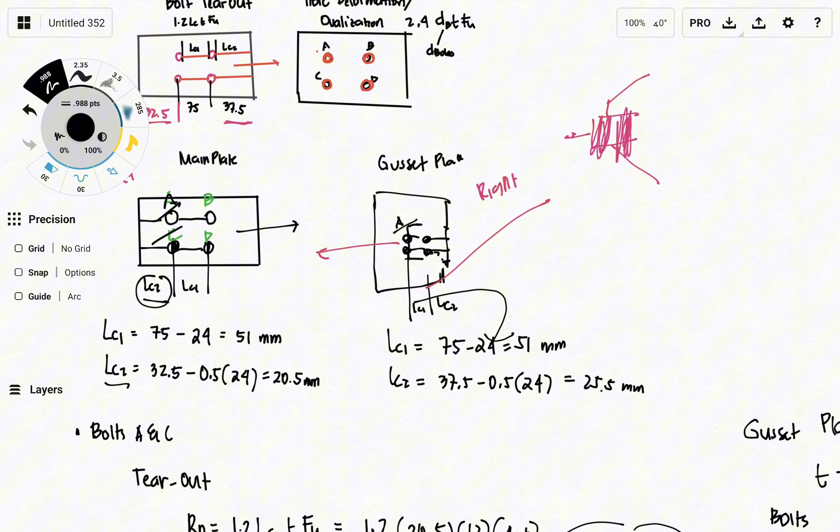For the gusset plate, we have A, B, C, D. For A and B, we'll use the interior case — so it's different now, meaning we mislabeled earlier. This one will be A, B, C, D. For bolts A and C, the LC we'll use is this one, the 51 mm, which is what we used for bolts B and D referring to the main plate.

They just differ in thickness, so we'll use this for the tear out. For tear out, we can just use ratio and proportion to be faster, so 9 over 12 since the spacing is the same. That gives 293.76 times 9 over 12. It becomes lower, from 293 down to 220.32 kN per bolt.

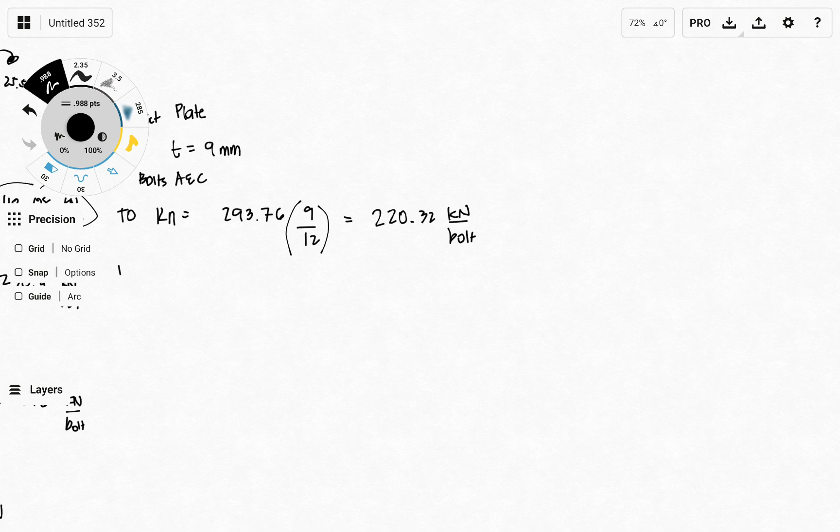This one covers tear out and hole deformation or ovalization, you can call it either. For B and D, we can also use ratio and proportion: 230.4 times 9 over 12, removing the 12 mm. So we obtain 172.8, which is much smaller. Between these two, for bolts A and C, you pick the smaller value.

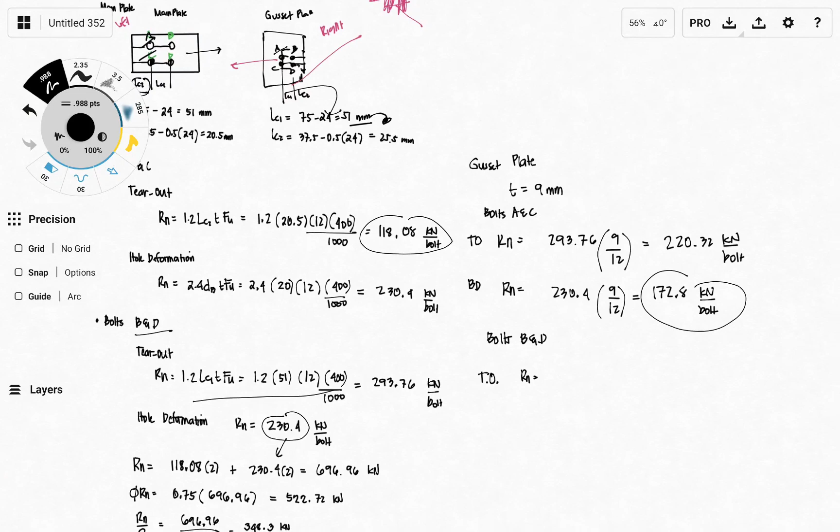Now for bolts B and D, the tear out Rn will use a different spacing, 25.5, which is much larger than the 20.5 we originally used for the tension member bolts. You might get confused because we have a lot of considerations, even though what we're considering is a simple system — just a gusset plate and a tension member.

This isn't even the complicated connections yet, but the process is already tedious as you can see here. But that's how designers work — if you really want to become a structural design engineer, you have to know the basics, the process of solving the problem. That's the requirement.

But of course, if we make one mistake, it affects our final results. But then again, these are all procedural — you'll get used to it, as long as you solve many problems, you become familiar with the process and with the sources of our mistakes.

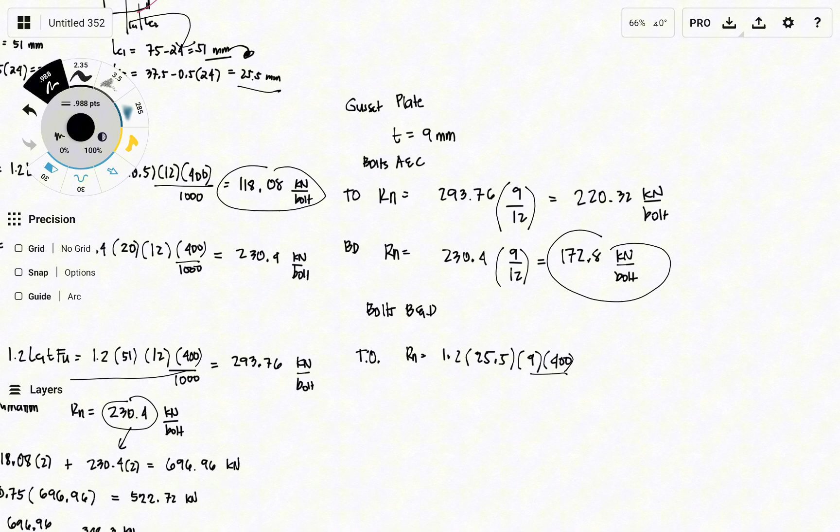Let's continue going back to this problem — a lot of comments have been made. So solving this Rn tear out, what if we try to solve it again? 1.2, don't use ratio and proportion anymore since we'll be using 25.5, but you can use ratio and proportion to shorten the process. So instead of 12, we'll use 9, then 400 — same thing, we divide by 1,000. Now for this one, the problem already took 30 minutes.

So we have 110.16, mas mababa compared dun sa original na 118. And then yung hole deformation will be the same, 172.8. Now we have to pick which one will govern. So 110.16 obviously. So again, we have to solve the total bearing. We expect na dito, ito yung mas mababa.

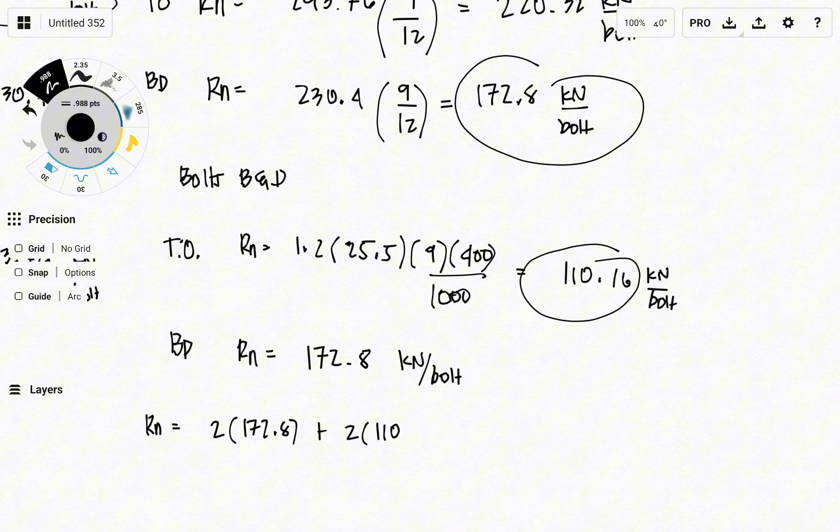Now for bolts B and D, we have to use 172.8, and then 110.16 for bolts A and C. So tig-dalawa yan, so pag madaming bolts, madami din kayong i-multiply. But you have to solve individually, each the capacity. Ganun yung sa final exam ninyo. Single bolts usually yung sinosolve, but to counteract the total force that we need to apply, we just multiply it by the number of bolts.

Magkaiba lang yung per bolt capacity nila against bearing. So in total, we have 565.92 kN, and hindi na siya per bolt kasi multiply na natin siya ng number of bolts. Excuse, and naubo pa tayo, that's why we can't be able to have a discussion.

And now solving for the resistance. So 0.75, times 565.92.

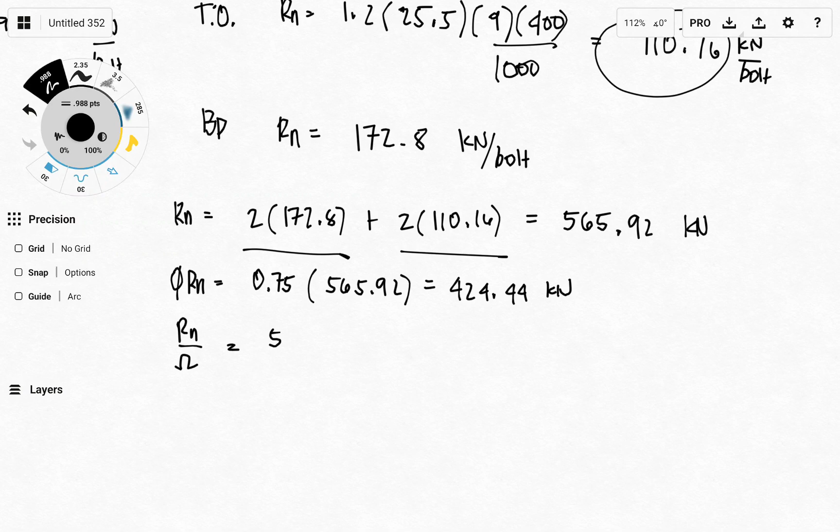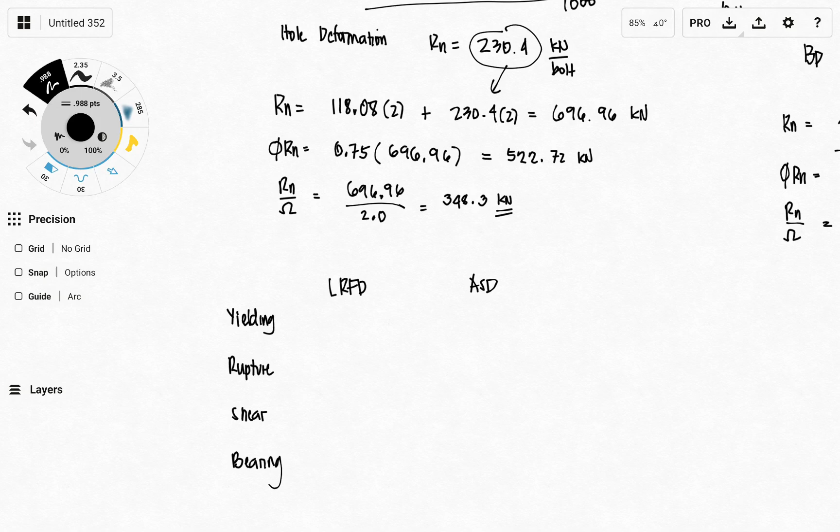Okay, so ngayon we need to pick which will be the design value that we're going to apply sa system. So the best way to do, para ma-determine natin, is to summarize yung mga nakuha natin na values under different limit states. So we start with yielding, rupture, bolt shear, and yung bearing for both LRFD and ASD, and then we just select whichever is smallest between those four limit states.

So we start with yielding, 401.76. Natandaan natin yung mga values. Lahat ng values ay in kilonewton.

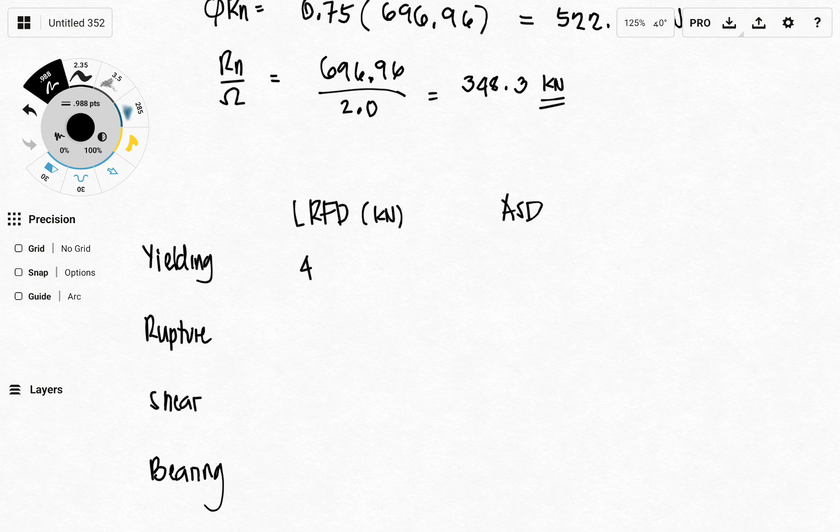401.76 and 267.305. Rupture: 367.2, 244.8. For bolt shear: 430.412, 287.142. And now for the bolt bearing, yung gusset plate yung critical: 424.44, and for ASD: 282.96. At almost close yung mga values.

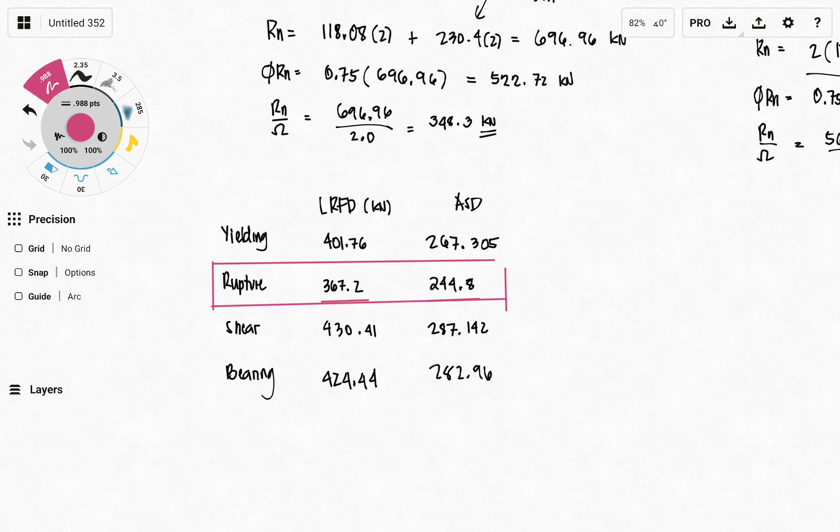And now our goal is to pick whichever of these four limit states, for the two different philosophies. So for overall, it is the rupture. Rupture pa din yung mag-govern because it gave us the smallest between these four limit states. So for rupture, we have 367, and also nag-reflect dun sa ASD, which is the smallest, 244. So all in all, despite considering the bolt shear and the bearing, it's still the rupture yung critical between these four.

So if you apply sa system ng 400 kilonewton, say for example, ito yung in-apply natin dun sa system, ito yung magiging high stress, no? Yung rupture yung magkakaroon ng most stress part. So our goal ay bawal tayo mag-apply ng mas mag-exceed pa dito sa 367. So most likely yung kailangan lang natin i-apply is 300 kilonewton, 360, as long as less than sa rupture. Kasi pag nag-apply tayo ng 400, pasado lang siya sa yielding, shear, bearing, pero hindi na siya pasado sa rupture. So we have to pick the smallest between this.

So for this problem, it is the rupture that is critical, and yun yung nag-govern for our design. So we need to apply a force here, a tensile force, with respect to the rupture value that we obtain, because yun yung critical aside over the other limit states. So I think that's it.

We will try a different problem for this one. How about we try this one? The same bearing type connection. So for our problem 2, given tayo ng bolt joint, and there's a load applied which is 300 kilonewton dead load and 500 kilonewton service live load. Then we need to determine the required number of 20 mm.

A325 bolts in standard holes with threads excluded from the shear planes. Then we assume that deformation at the bolt hole is a design consideration. So all plates are ASTM A36, and the standard hole for 20 is 22 mm. So therefore the effective hole will be 20 plus 4, or 22 plus 2. It's just the same.

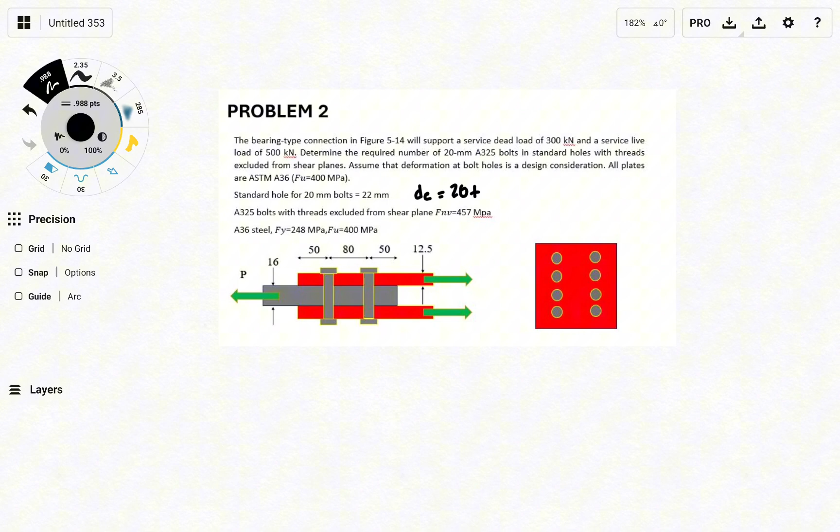Standard holes yung tawag natin. Para maging effective, we just add 2. But for now, the original diameter of bolts plus 4, or pwede din 22 plus 2, same lang yan, standard holes plus 2. So we have 24 mm. And provided na din yung shear, so we'll be using 4 rows per column of our bolts. So yun yung assumption natin.

So for this problem, aalamin lang natin kung ilan yung bolts na kailangan. Given tayo ng 2, we'll see kung ilan yung kailangan for this one. We'll try first to solve kung ano yung magiging capacity natin for shear or bearing. So we have 2 limit states that we need to consider.

Okay, so for this one, the reason why we only limit our limit states to shear and bearing, and not consider yielding and rupture, is because we don't know yet the number of bolts needed. And the number of bolts depends on what the width of the plates will be. So if we need a lot of bolts, like 10 or 5 bolts per column, then the thickness and width of our plate becomes larger. Therefore, yielding and rupture is not a consideration for this type of problem. So our goal is just to solve for the number of bolts depending on the shear capacity and bearing capacity of our bolts and also the plates.

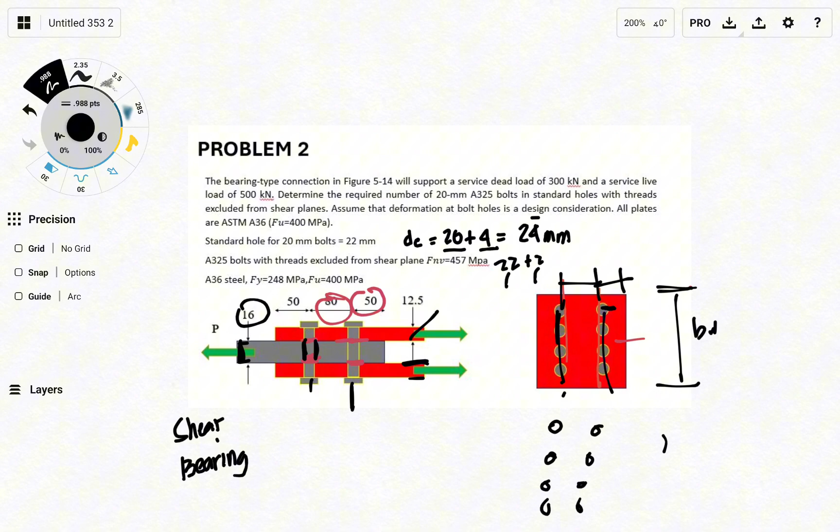Now, we can still solve this problem regardless of whether we have the width. As long as we have the spacing, interior and edge, we can solve for the bearing capacity. So for this one, we'll stick with 2 layers of columns, that's the constant. But what's not constant is how many bolts per layer of columns, because we can make the width of our connection plate bigger, but we can't change the spacing provided in the problem. So we'll be focusing on shear and bearing.

Okay, so the shearing capacity, we don't know yet how many bolts are needed. But we have the PU. So we'll try to limit it to the LRFD condition only. So PU equals 1.2 times the dead load of 300 plus 1.6 times the live load.

Alright, so our goal is just to equate this to our formula for shear. So we'll try to solve this: 1.2 of 300 plus 1.6 of 500. Then we obtain 1160 kilonewtons.

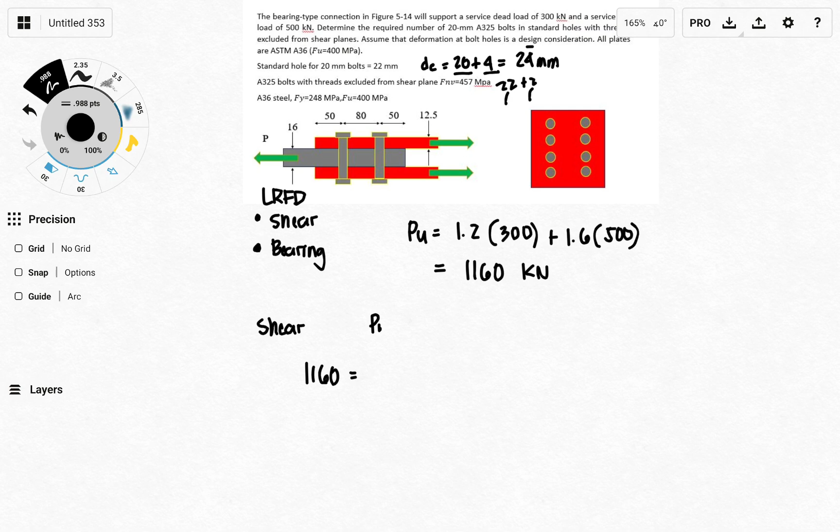Okay, so we start with the shear. So we use LRFD for the solution: 1160 equals pi over 4, and let's not forget the reduction factor. So phi Pn for shear is phi times area of bolts times Fnv, which is 0.75 times area of bolts, and the number of bolts. We use pi over 4 times the nominal diameter of the bolts, Fnv given in the problem, and the number of bolts required. This is the easiest part.

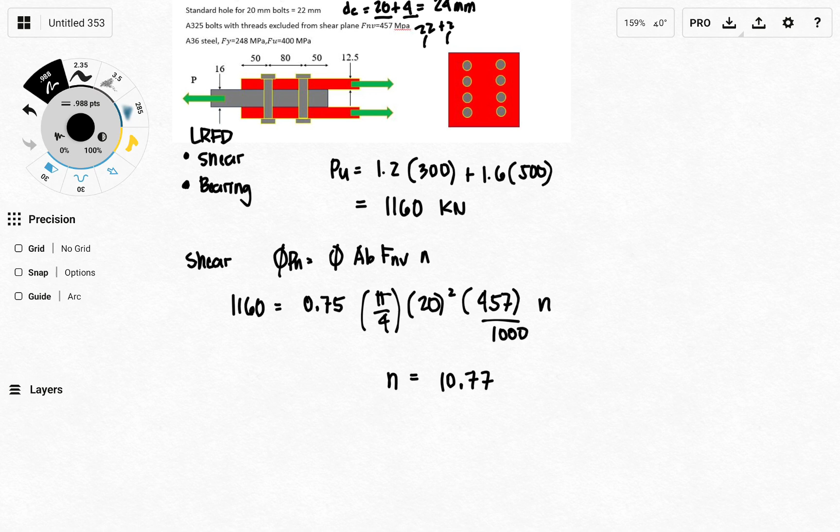It gets a bit more challenging when we now consider the bearing. So let's try to solve this: 0.75, then pi over 4, 20 squared, 457. Then we obtain 10.77.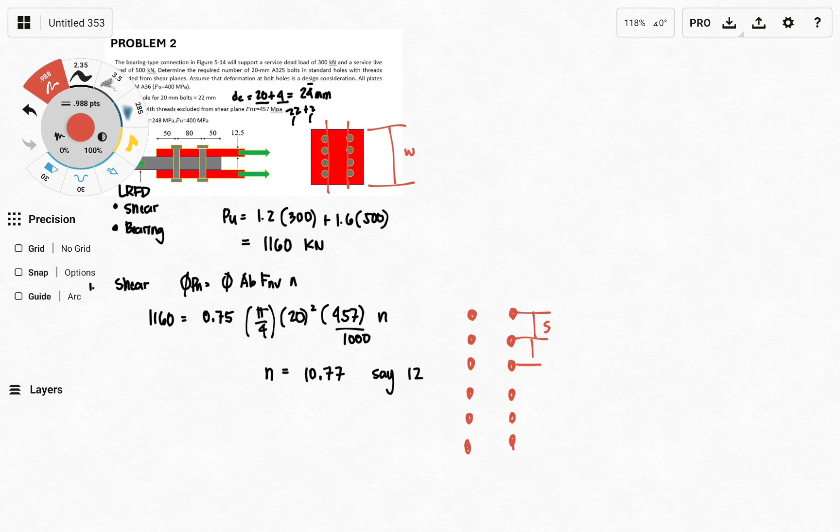Now what we need to design is the width of our plates and the spacing here, which is already provided by the code for what spacing we should use. But for the design of the bearing, our concern is when we have a tensile force, so what extends is this, this is the spacing needed.

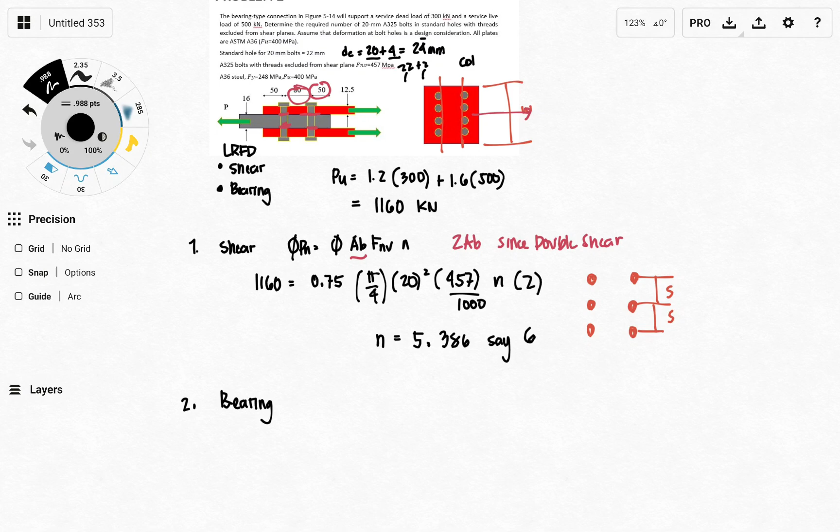So what if for column 1, let's check what's needed. So bolts for layer 1 or column 1 of our bolts. For column 1 bolts, let's check whether tear out governs or bolt bearing. So, bolt deformation, tear out, 1.2 LC. What is our LC? So for column 1, here it is.

Yun yung LC, LC2 yung kailangan natin i-consider. So we have 50 minus half ng natin, effective, which is 24. And then yung thickness ng bolts natin, thickness ng plates. So what is the thickness of the plates?

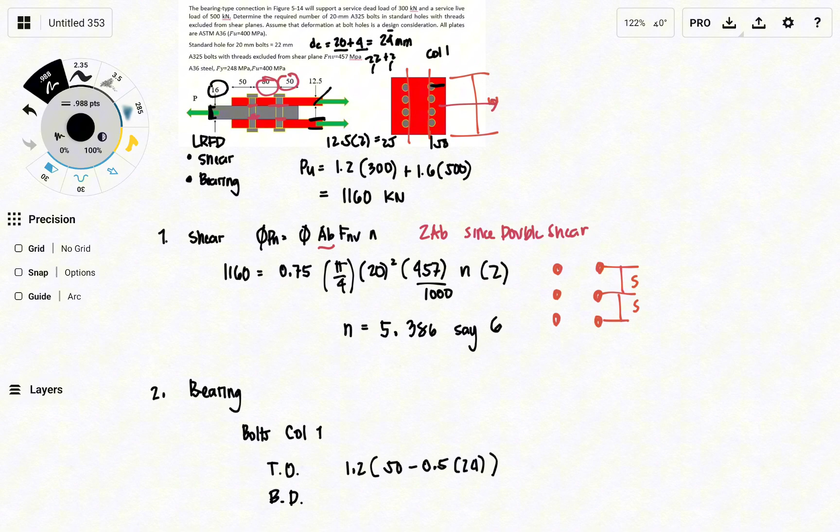Kailangan natin i-consider both. Pag ito yung consider natin, yung upper plates, we need to multiply it by 2 kasi simultaneous siya mag-fill nung bottom plate. So 12.5 times 2, it's 25. Pag consider natin tong thicker plate, 16 lang siya, wala na tayong multiply na 2. So between the two plates, yung upper or lower plates, ang total thickness nila is 25, compared din sa thicker plate, pero isa lang consider natin, so this is only 16 mm. Between these two, we pick the smaller, so we have 16 mm.

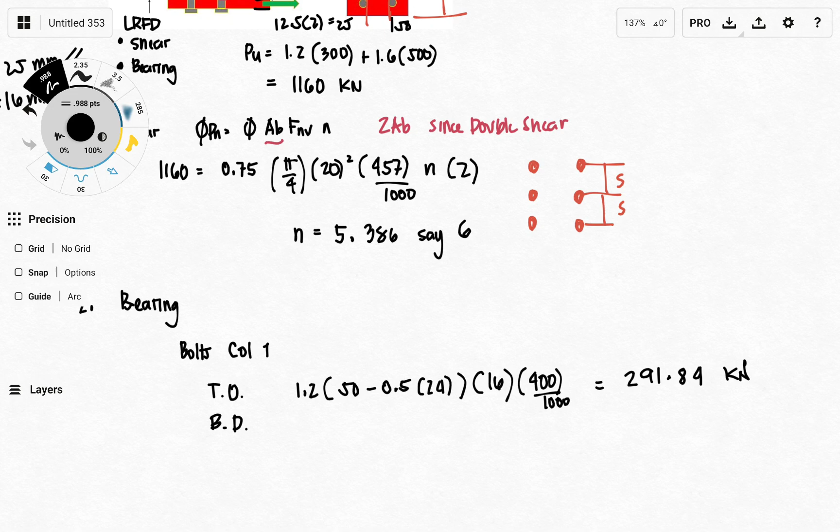And then FU, 400, divide natin ng 1,000. 1.2, 50, minus 0.5... 291.84 kilonewton. Then for bolt deformation, formula natin dyan, 2.4 dB.

Ano yung dB natin? Original, 20. Thickness, 16, and then 400, divide yun, then 2.4, 20 times 16. Huwag niyong kalimutan to, kasi yung formula na to.

So for bearing, disregard nyo na lang kung double shear, kasi it depends on the thickness. It's the contact part, no? So thickness yung mahalaga dyan, hindi siya double area. So it's only for the shear kung meron tayong double area na kailangan i-consider. So this one is per bolt muna yung makukuha.

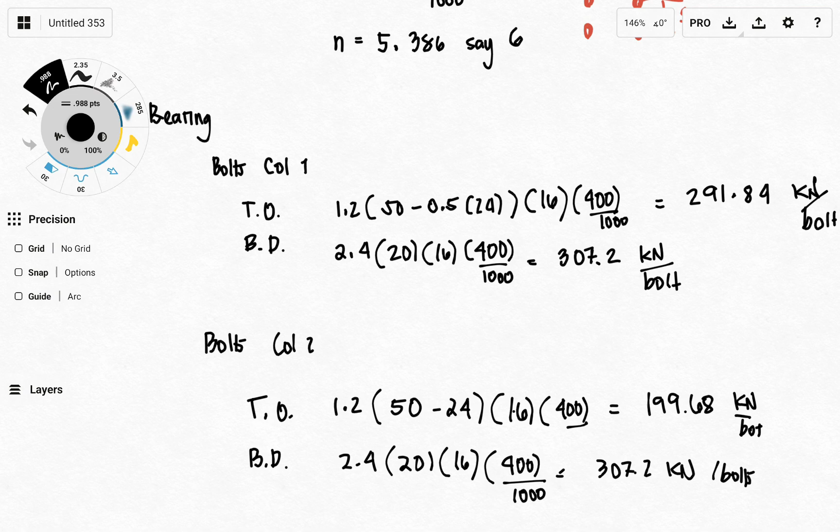And then for bolt deformation, same lang naman yung diameter ng bolts. Formula the same, and also the value that we will obtain will also give us the same value, 307.2 kilonewton. Now for bolts under column 1, along the column 1 line, we pick the smaller, so 291.84. And then column bolts along column 2 or line 2, we pick also the smaller, yung tear out yung mag-govern. So same condition for bolts along layer 1 and layer 2, tear out yung nag-govern.

Okay, so now let's try solving for the number of bolts na required. So we know na 2 columns ng bolts yung kailangan natin i-consider, and we also expect na dapat yung number of bolts nito within columns, within each of the columns, kailangan the same yung number of bolts na ma-solve natin. So for this one, we just try to say na X yung required columns natin per layer ng bolts. So we try to solve for the number of X.

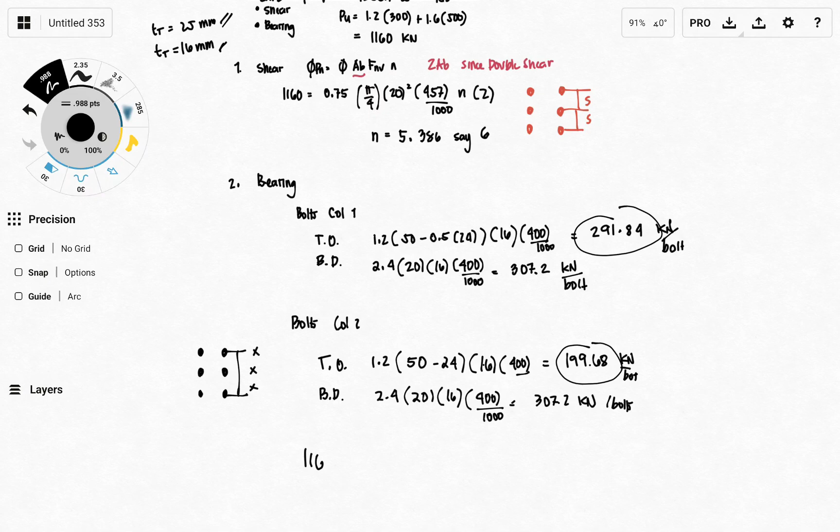What if bearing yung mag-govern, we still use the 291.84 kilonewton, and then using 0.75 as the reduction factor for LRFD under bearing failure, no. And then solve natin. So x number of bolts for first layer of column, which we have a 291.84 kilonewton per bolt capacity. The same value of number of bolts for the second layer of our bolts now with 199.68 kilonewton per bolt, and don't forget to multiply by 1,000 kasi naka-kilonewton to. Divide pala ng 1,000 para tama ba, or no need na, kasi naka-kilonewton per bolt naman lahat. So tama, kilonewton to, kilonewton per bolts, and then kilonewton per bolts.

Now we solve for x, yun yung unknown natin, shift solve na lang yan. Ayan, so at least nakikita natin kung ano yung mga possible na mamamali tayo ng assumptions. Alpha x, pwede nyo i-factor out yung x. So yung x natin is 3.146.

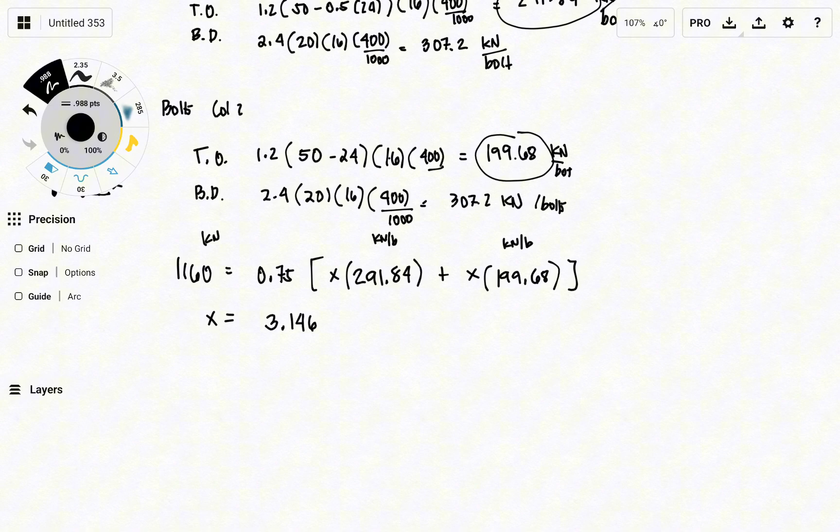Bolts. So dapat per column, 3.146. Okay, so ayun, so mas kailangan, mas madami. So say 4, in total, per ano lang kasi to per layer. So we have total of 2 layers na kailangan. So 4 bolts per layer. So bali ilan yung kailangan? Times 2, so 8 bolts. Mas malaki yung, mas mataas yung kailangan. Based sa illustration, mas nag-govern yung bearing kasi kailangan niya ng 8 bolts compared dun sa 6 bolts for shear.

Okay, so let's try now. What if meron talaga tayong 8 bolts? Ngayon, ano yung mag-govern? Ano yung PU required? So what if meron talaga tayong 8 bolts for per layer ng column? Hindi natin gagamitin yung PU required, but we need to solve for the capacity of our section.

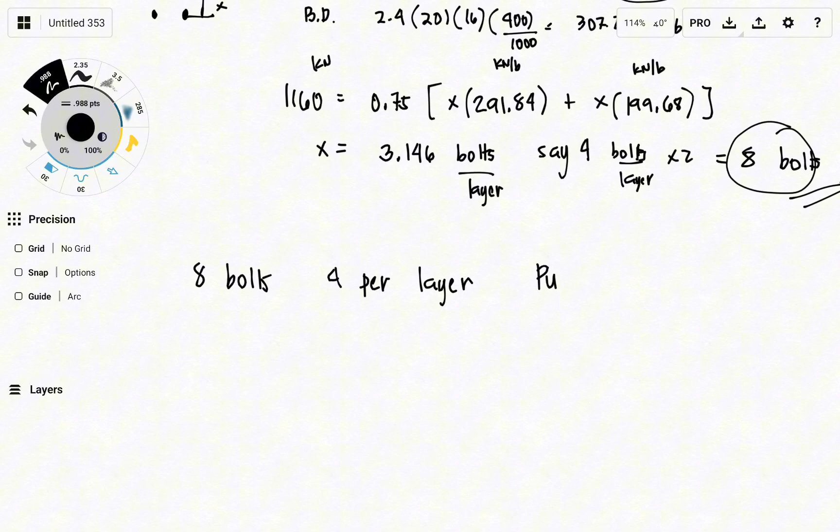Okay, so for shear, this is a double shear. So what will be the PN, which is yun na din yung magiging overall, no? So PPN, meron tayong 8 bolts, we use 8 bolts in total. So the AB, phi, and then FB, number of bolts, and this is a double shear times 2 na lang. So 0.75, and what is our AV? Pi over 4, area ng bolts natin, 20 squared, FB, 457. We have total of 8 bolts in consideration.

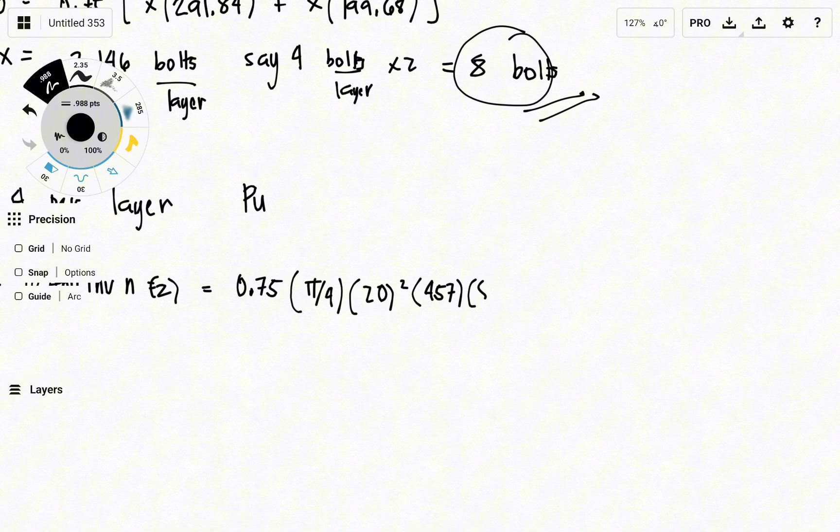So, 0.67 yung DC ratio. Now, we'll be using the bearing. Na yung bearing, and then we have 8 total bolts and 4 bolts per layer. So ito yung required, di ba, pag bearing.

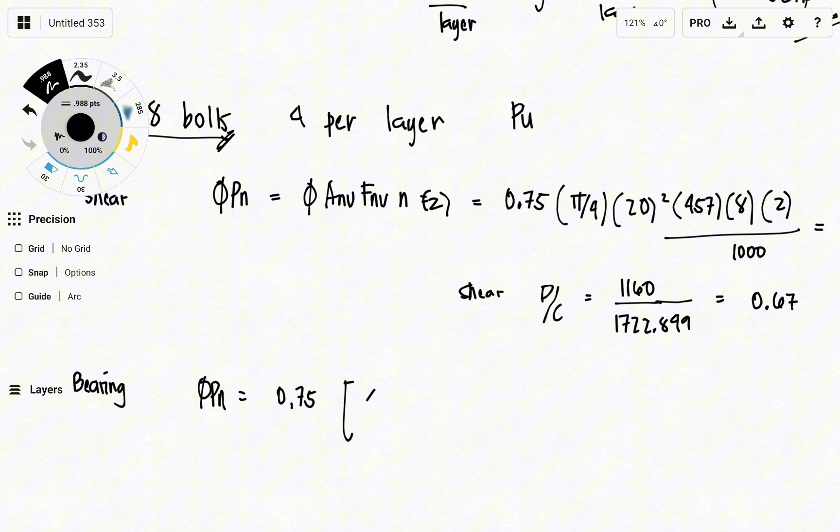So we expect na close dun sa required strength yung capacity natin for bearing. We'll be using the same capacity per bolt. So important na na-solve nyo muna yung capacity per bolt para madali na lang yung sunod, no? 0.75. And then the nominal capacity per bolt, we have 4 bolts per layer. So 291.84 plus 4 din dun sa kabilang layer, 199.68.

So 0.75. Wala nang double shear pag mga bearing. So we obtained 1474, which is medyo higher pa nga dun sa required, no? Okay na yun. Basta ang goal natin is hindi mag-exceed ng 1.0 yung DC ratio.

So bearing, we have DC, 1474. I mean, yung design natin or required is only 1160. And then yung capacity niya is 1474.56.

So important na for design, we pick the higher, no, between the limit states. So meaning to say, mas critical yung bearing, no? Kaya nag-require siya ng mas mataas na number of bolts.

0.67 only for shear. We have the same PU na required is 1160. So for shear, hindi ganong critical. 0.67 lang siya compared dun sa bearing. So meaning to say, for this one, bearing yung nag-govern.

That's why we need to require a lot of number of bolts para ma-satisfy yung required strength natin. So bearing yung critical for this one.

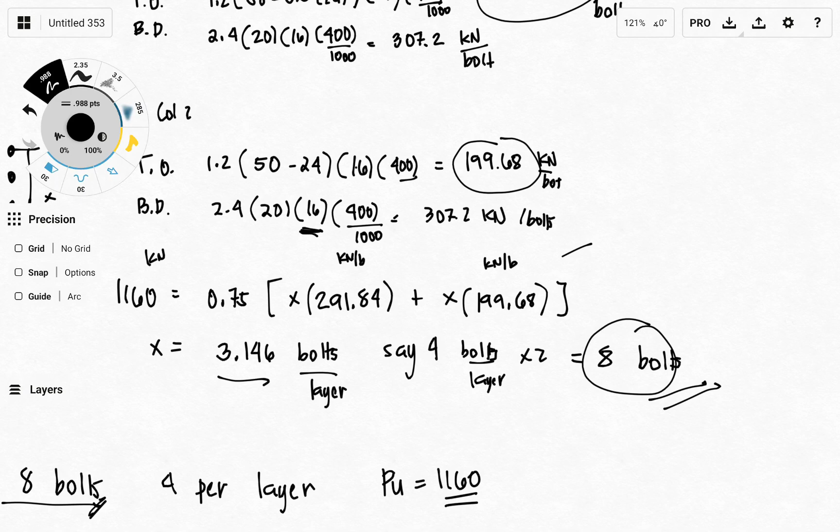Pero kapag shear naman yung critical, mas madaming bolts yung magkukuha natin for calculating if shear yung critical for this one. No, kapag malaki kasi yung thickness ng mga bolts ng bearing plate natin, ng plates, about 20 yan, magre-reduce din yung X number. Kasi ito ay lalaki. No, kapag lumaki yung thickness ng bolts ninyo, say for example, naging 20 na siya, so of course lalaki na din yung capacity niya per bolts.

So gawin natin, for example, kilonewton per bolt, 300. Tapos dun sa layer 2 ay naging 215 kasi in-increase natin yung thickness. So ilan na lang yung kailangan. I-equate natin ulit, no? 0.75. Tapos solve nyo ulit yung X.

So since lumaki na yung mga value na to, i-factor out natin yung X. Divide natin ng higher value ng denominator. We expect na mas liliit na yung X. So ngayon, nag-govern yung bearing kasi yung thickness natin hindi ganong mataas, no, compared dun sa area ng bolts.

So magtake kayo ng value 3 na lang. Pero almost close pa din siya para mayroon pa din siyang buffer. So bali mag-round up pa din tayo, say 4. So dapat mga less than 3, like 2.99, para masabi natin exactly 3 bolts lang yung kailangan.

Okay, so pwede pa natin i-utilize yung problem. So ilan yung bolts na kailangan, ilan yung PU na kailangan para ma-utilize talaga natin. So ito, yung kailangan natin bolts, capacity. Pwede ba siyang umabot ng 1474, 1722?